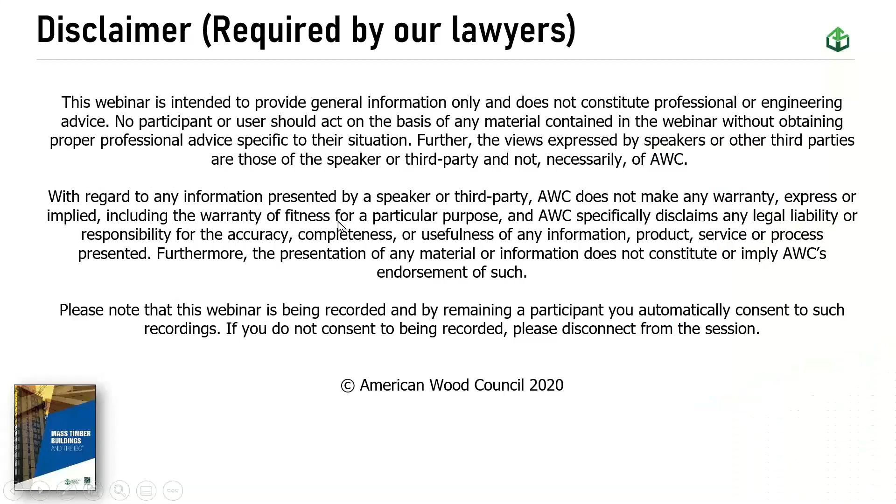A little bit about this course in particular. You've already read the description, I'm sure, but this photo here is of the Brock Commons student housing at a university in Vancouver, Canada. It's still, I believe, though not for long, the tallest mass timber structure in North America, and it is made of mass timber.

So the topic, of course, is heights and areas. This is a tall one, 18 stories above grade, 17 stories of mass timber on 1 story of type 1 podium concrete construction. And of course, the new thing here is this is wood construction.

There are some non-combustible cores to this building. You can see them on the left there. Let me get my spotlight going here. So this is part of the core, the exit shaft, elevator shaft also in the building. And the rest of it is mass timber, cross-laminated timber, glue lam, and also, of course, non-combustible materials.

I'll mention that though we're talking, the feature of this is all the tall mass timber. The other webinars, the introductory webinars to this series, do cover the mass timber products and how they can be used in low-rise as well as high-rise buildings. But today we'll discuss the development process, and really you'll get a sense of the thinking all around the topic of going higher for wood construction and why.

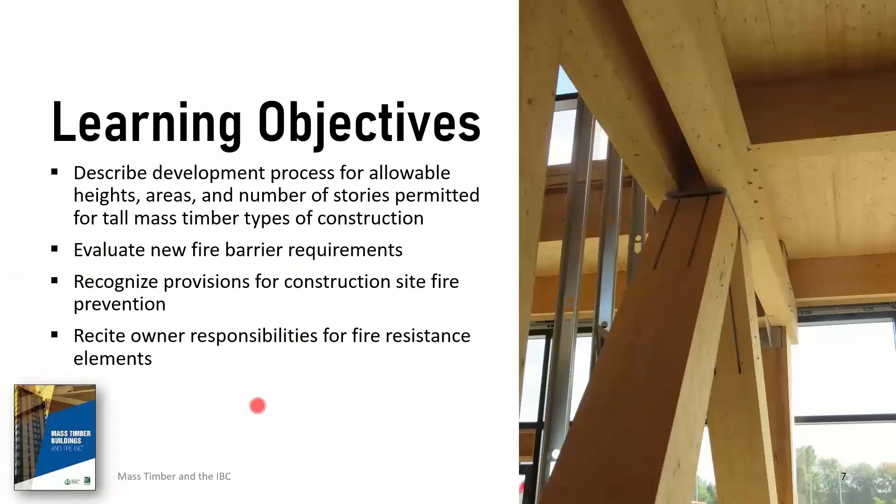A couple other just random topics, as it was impossible to list all the individual topics: fire barrier requirements, construction site fire prevention. This is really a separate topic, and it's kind of unusual that we combine these two topics, but they do go together well, because there are some specific provisions for taller wood during construction, and then the owner responsibilities that have to do with the fire code and building maintenance.

So here's the series that we've been offering. This is part 2 of the second half of the major series, which is focused on the new construction types for tall mass timber. These two focus on what is mass timber, what are the products. The second one is available on our website. You can find out what adjustments were made to the code that have to do with heavy timber, which are necessary background for really plugging into the brand new construction types.

And when I say construction types, I'm never quite sure how familiar everyone is with the code. Sometimes we have people that are pretty unfamiliar with the code on the webinars, but you have traditionally types 1 and 2, non-combustible.

Those are your highly fire resistant, taller buildings, high rises and so forth. Traditionally wood is in the mid-rise to low-rise range in types 3, 4, and 5 construction. Well, what's happened is 3 new construction types were introduced into type 4, and they can be high-rise buildings.

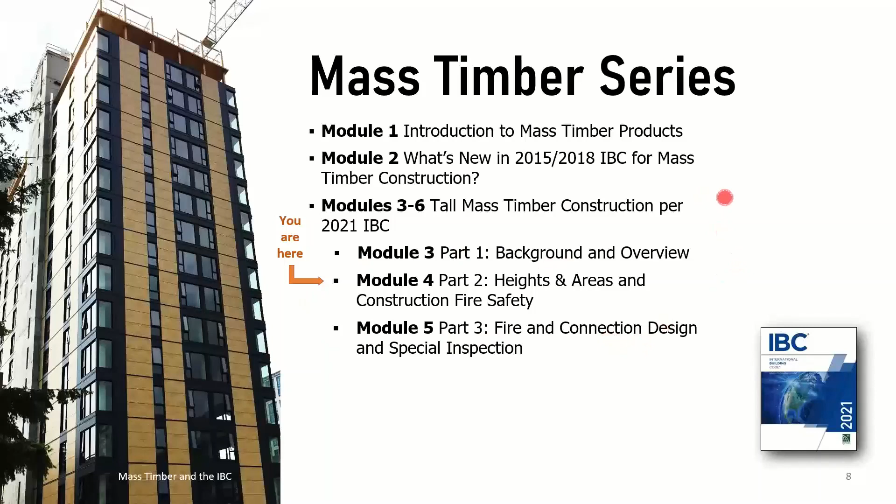Yep, it's always interesting too to see the makeup of the audience. I usually wait for about 30 seconds or until about 80% have voted. And it looks like I'm going to have both. So here we go.

All right, so 49% engineer, 32% code official, 7% architect and fire service, and then 4% other. So no matter your profession, we are delighted that you are here and hope that you find something of value.

Great. Nice spread. Glad we have a good showing with code officials and engineers. And we were discussing a little bit beforehand, the topic of heights and areas might be pretty boring to architects. They do it routinely, but this really goes beyond that. And I hope you'll find it interesting and useful.

So mass timber is not conventional frame construction. And it is new, it is very new. And if you're skeptical about that at all, and maybe perhaps skeptical about the increased heights and so forth, let me just start by saying everything you see here is not permitted over here. You're seeing studs, you're seeing joists, you're seeing repetitive member assemblies.

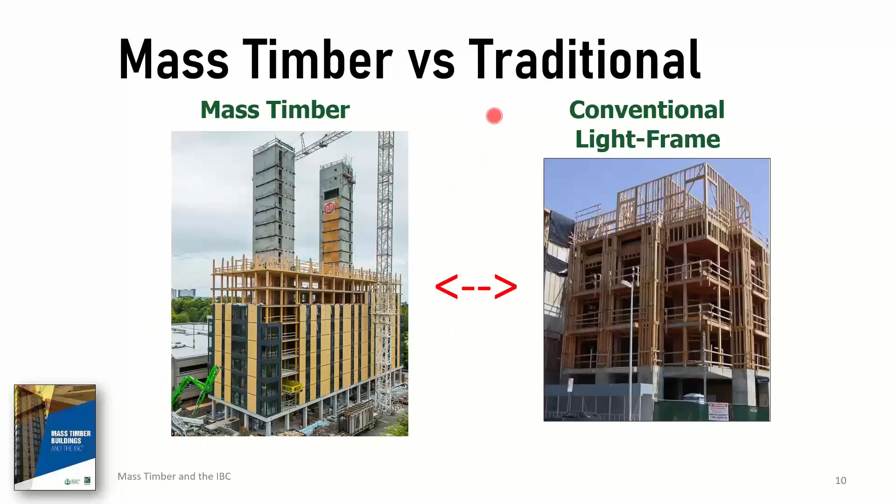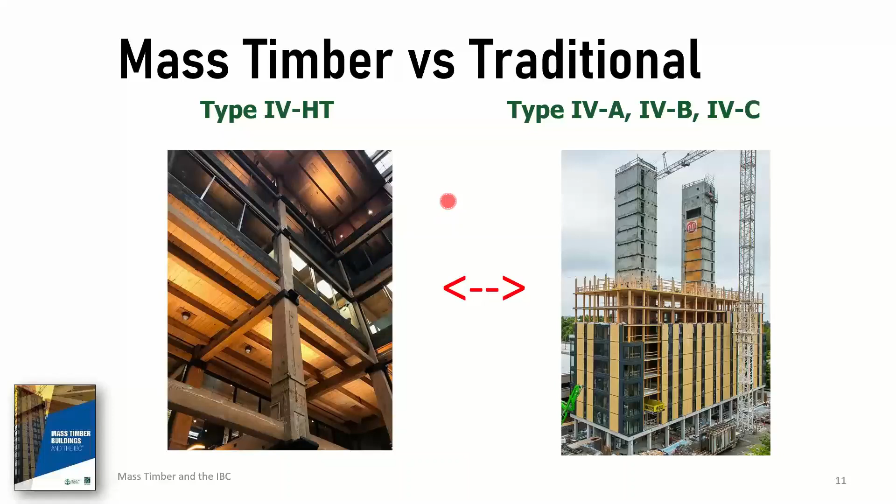Also, mass timber now on the right side here is different than traditional heavy timber construction, type 4, what is now called type 4 HT. Some of the differences here, primarily for mass timber compared to traditional heavy timber, is the fire resistance. It's very highly fire resistant compared to traditional heavy timber. And there's other features that are required for the building overall.

And I'm going to make a big deal out of this topic of non-combustible protection, because not only are light frame wood assemblies not permitted, but they have to be mass timber or non-combustible in a mass timber in the new construction types. Not only that, but we're going to see there's a new concept, and you've heard about it in other webinars already, but it's the concept of required non-combustible protection on mass timber surfaces.

So then we'll discuss heights and areas, construction fire safety, and among those, owner's responsibility having to do with the existing building when it's done.

There are a couple new definitions in the 2021 IBC. And by the way, this is available in PDF form right now from ICC. You can purchase this and you'll get the PDF right away. The printed book is not quite available yet.

And I'll mention right now, we didn't really mention it in the morning session of this same webinar, and I should have, but this document, Mass Timber Buildings and the IBC, produced by the International Code Council and the American Wood Council together, is also available. This is available in print and PDF. You can order this right now. It does go into detail and illustrations on all the requirements of the new 2021 for tall mass timber that we're discussing today. So it's a great resource. I highly recommend it. It's the significant changes book among that series for ICC, which are so popular. Well worth getting. I think it's $40 or something.

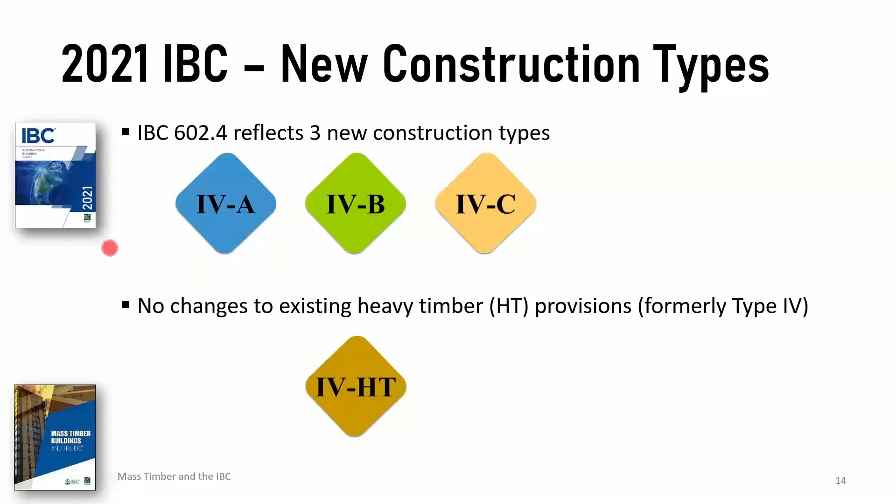I hope this will give you some context for the differences between the new construction types in regard to non-combustible protection or materials requirements.

I know that some of these concepts for the new construction types are hard to get our heads around because they are new to the code. We haven't really seen anything quite like it yet, particularly the principle of adding non-combustible protection to the calculated fire resistance of heavy timber. But this may help us with some context.

First of all, there is no exposed mass timber surfaces in Type 4A construction. Type 4A allows the greatest heights of the three construction types and the greatest areas.

There is limited exposed mass timber permitted in Type 4B. It says 100% non-combustible protection on all surfaces, except limited exposed mass timber elements. It will be around the range of 20% of the floor area for the ceiling, 20%, 40% of the floor area for the walls. We'll see that. So limited areas, not half, not even a quarter in some cases for the ceilings, but some.

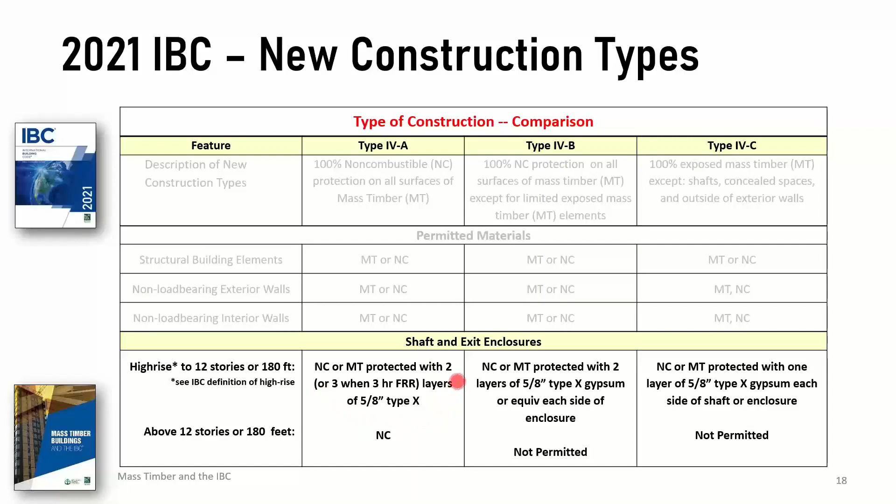They can be mass timber if they're up to 12 stories, not beyond, but the mass timber is heavily protected with non-combustible material. Same with Type 4B - the ratings are a little bit less, but the protection is basically the same, slightly less in the case of 3-hour elements.

And then in Type 4C, the shafts and exits can be mass timber. They can also be non-combustible, of course, but the mass timber is protected with one layer or 40 minutes, we'll see, of gypsum. And they still have to be required to be rated for the full time, typically a 2-hour rating for shafts.

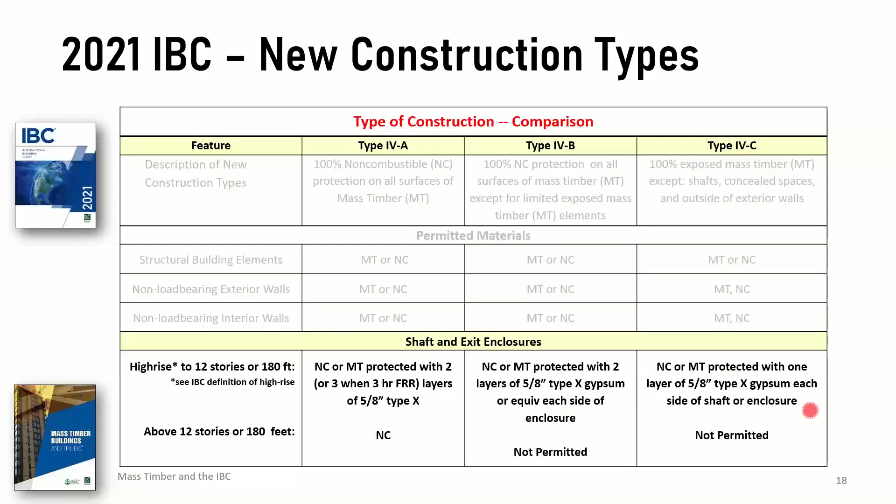So here's the new deal. We've gone into great detail in some of our other webinars about this principle: 2/3 of the fire resistance rating being achieved by the non-combustible protection on the mass timber. That's a new principle for the three new construction types. It does not apply to any other existing construction types.

So what does that mean? It means if you have a floor that's 2 hours, the whole floor has to be rated for 2 hours, and the bottom of the floor has to be protected with at least 2/3 of that 2-hour rating, which is 80 minutes. So while the whole floor together with the non-combustible protection has to achieve 2 hours, there's a minimum requirement for how much of that has to be met by the non-combustible protection. That's the new way of thinking. It does not apply to other construction types.

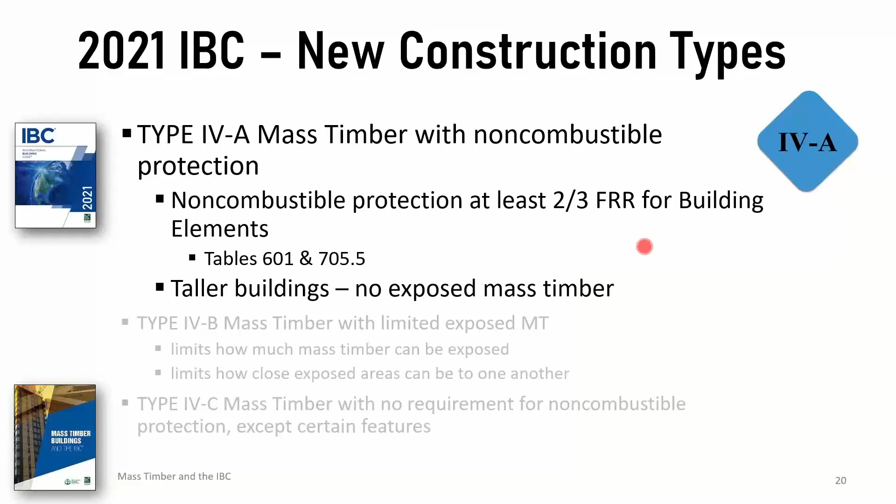No exposed mass timber in type 4A. In type 4B, the same principle applies, but you can have some exposed elements, and those exposed elements still have to meet the full fire resistance rating by calculation for an exposed element. So typically on the parts that cannot be exposed, which is most of the surfaces, you'll have some overkill on the fire resistance ratings because they'll go ahead and add the required 80 minutes for a 2-hour, 2/3 of 2 hours, and there'll be that much more fire resistance.

And then type 4C, there's no particular requirement that the 2/3 has to be achieved by the non-combustible protection, except certain features are still required to be protected. As I mentioned, shafts and concealed spaces are the primary ones.

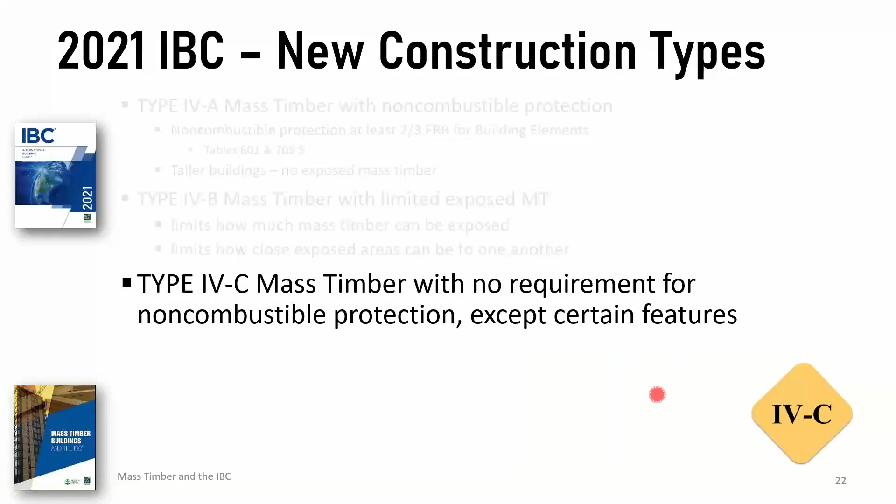All right, a poll question. I'll turn this over to Marcy and see if you've caught what I said about type 4A construction. So type 4A construction: what fraction of the required fire resistance rating must be provided by non-combustible protection? Is it 1/3, 1/2, 2/3, or variable depending on the building height?

All right, I've got about 70% and 45 seconds, so I'm going to close and share the results. So 67% say 2/3, 25% say variable depending on the building height. Paul, what say you? I say 2/3. So let me advance the slide to highlight the answer.

So for 4A construction, whenever it's required to be fire resistance rated, it always requires 2/3 to be achieved by the non-combustible protection, no matter what the height of the building. If it's required to be 4A, 2/3 of it has to be achieved by the non-combustible protection. This was a tricky throw off there. There are other things that do depend on the height.

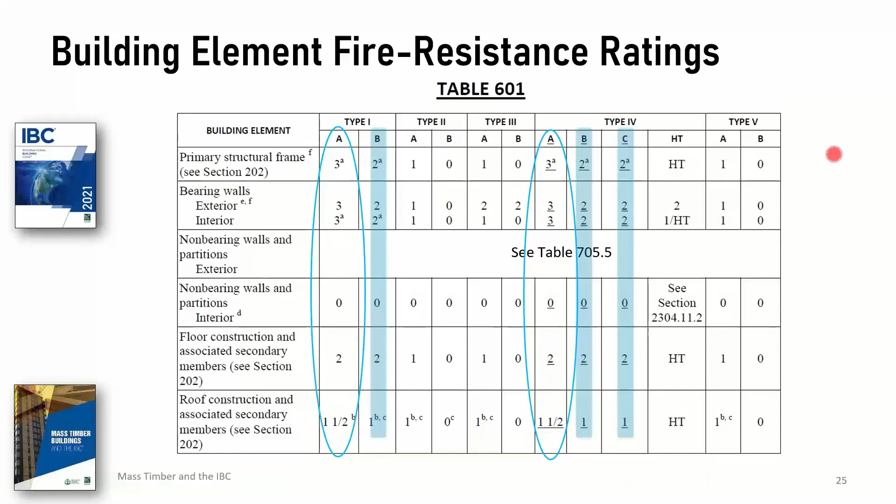This doesn't exactly match your PDF, so don't be alarmed, but I did insert the title for this table. Those of you who got an earlier version of the PDF, it just says table 705.5 up there. Same slide, same table content, just added the title back in, which was omitted for some reason—my mistake.

You might say table 705.5 doesn't ring a bell. That's because in the 2018 code, it's table 602 for exterior walls. Currently in your code, when it comes to exterior walls, you have two tables to worry about: table 601 that we already looked at, and table 602. But that number has been changed.

Now, both tables deal with exterior walls, as you know. So what if these conflict? This is what the code requires you to do: you take, for the exterior wall in question, the more restrictive fire resistance rating between the two tables. End of story for what the rating has to be. Just take the most restrictive. Now, some of you are questioning in your minds the two different purposes of the table, thinking they've got to work together better than that. No, that's all it is—the more restrictive rating.

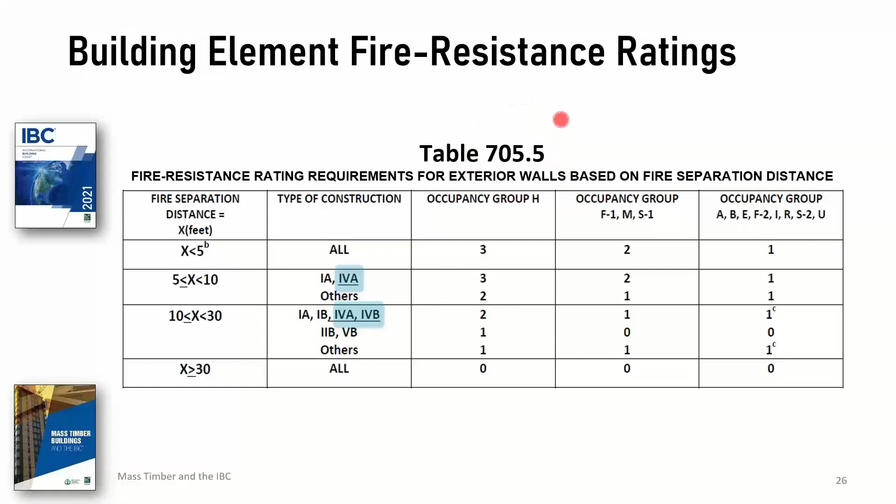Where did I find that requirement? Well, that requirement's in section 705.5. It's not new, by the way—that's been in the current code.

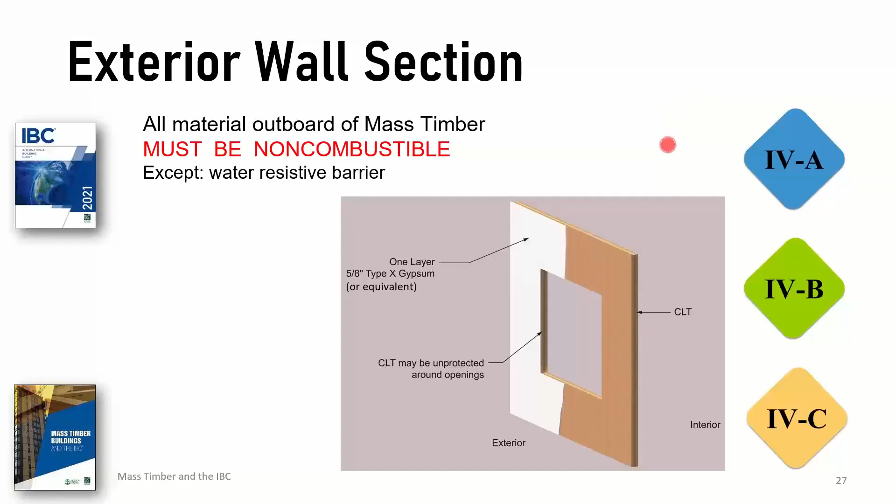Secondly, there is 40 minutes of non-combustible protection required against the mass timber on the exterior side—equivalent to one layer of type X 5/8 inch thick gypsum board on the exterior side. Ray makes a comment in his portion of the presentation about some of the reasons for this, which has to do with the committee deciding they never wanted a fire to be able to travel up to greater heights in a building by taking the route of the exterior side of the exterior wall. This requirement applies to all these construction types.

I'll give you an example now of a cross-section of a type 4A exterior wall. This is an exterior wall, so right off the bat, this is the exterior side. It's got that 40 minutes of non-combustible protection on the exterior. On the interior, if this is a bearing wall, this has to be 3-hour rated. Table 601 tells us bearing walls in type 4A have to be 3-hour rated.

We've said that 2/3 of that overall required fire resistance rating has to be achieved by the non-combustible protection. 2/3 is actually 120 minutes—3 layers, the equivalent of 3 layers of 5/8 inch thick type X gypsum board over here. So it's a typical bearing wall in 4A. You can see how conservative this is in terms of fire resistance. And by the way, fire resistance for a mass timber wall that's solid timber is really quite different than a repetitive member assembly. When we did our first compartment fire tests with mass timber, AWC did it back in 2015. We did an exterior wall test, and it was a 5-ply exterior wall.

This just shows 3-ply, so that would have been like, let's see, 5 would have been like 7.5 inches thick or something. But anyway, we had 1 layer of 5/8 inch type X gypsum on each side, and the wall achieved a 3-hour fire resistance rating with just 1 layer. So the massiveness of the timber and the uniformity of the plane to support the gypsum, all that kind of stuff - really, fire resistance for mass timber is significantly greater than for frame assembly.

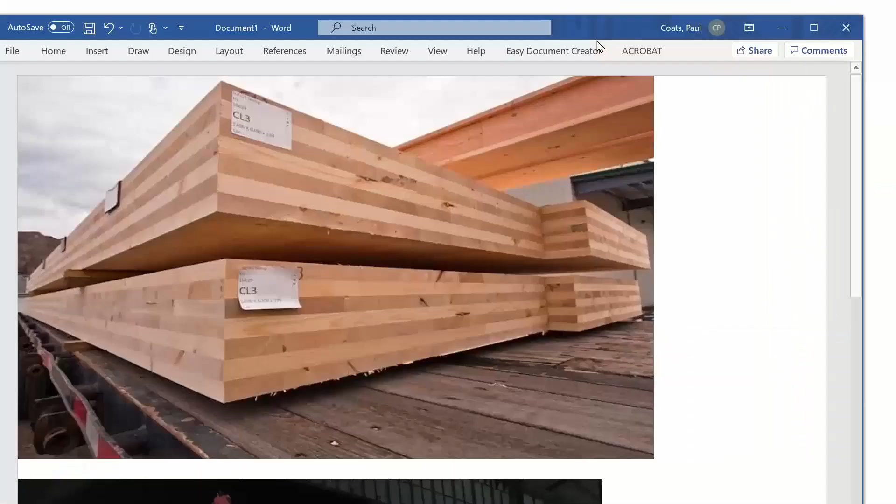I'm going to pull in a photo here. This is, if you are not familiar with cross-laminated timber, a good picture of it. It makes solid timber walls, floors, and roofs. This is what the structure was that was tested.

Let's see if I can. Whoops! I got to get out of this apparently. Let's see if I can do this.

So the test was performed in this test facility. You can see the scale of the testing here. If you haven't seen these photos already - they burned this one with an exposed ceiling already, and they're replacing the CLT panel for another test. I just wanted to pull those photos in to give you a sense that they let these fires burn out.

They wanted them to perform like type 1 buildings, and that's what they were testing for. So the protection, conservative as it is, we are going higher. At first blush, people think of a wood building going up to 18 stories - they think it's not the same story as a typical wood building, and the testing has really supported that.

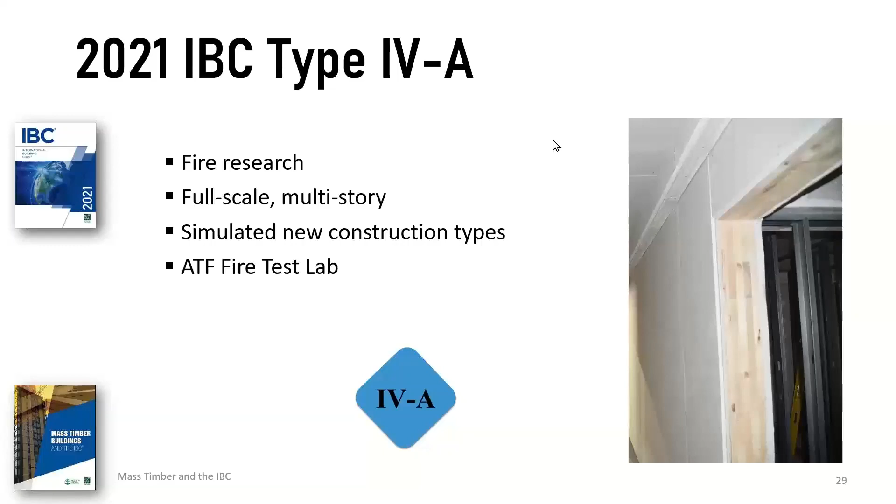So going up, here's a first requirement right off. Let's say you have a type 4A building - this shows a schematic at 18 stories. Only certain use groups can go up to 18. But you have 1 inch of non-combustible material above the mass timber on the floor, and this also applies to type 4B buildings.

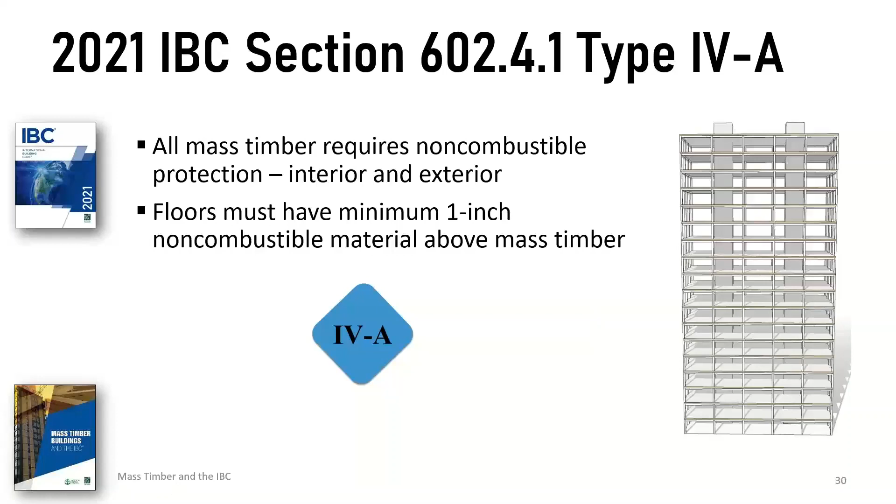Of course, we've already discussed the interior and the exterior covering. The reason the committee included the 1 inch on the mass timber floors was they had not tested anything, nor seen any tests, that were not done with floors protected with concrete. So they decided they needed to keep that as one of the requirements.

Just looking again quickly here at a type 4B wall section. The difference between type 4A and 4B is this: you can have some exposed mass timber, and 4B is never required to be 3-hour rated - it's always 2 hours. So you have 2/3 of that is 80 minutes, which is 2 layers of 5/8 inch type X. These are supposed to be equally thick layers - the diagram doesn't make it look that way. But once again, 2/3 for 2 hours is 80 minutes.

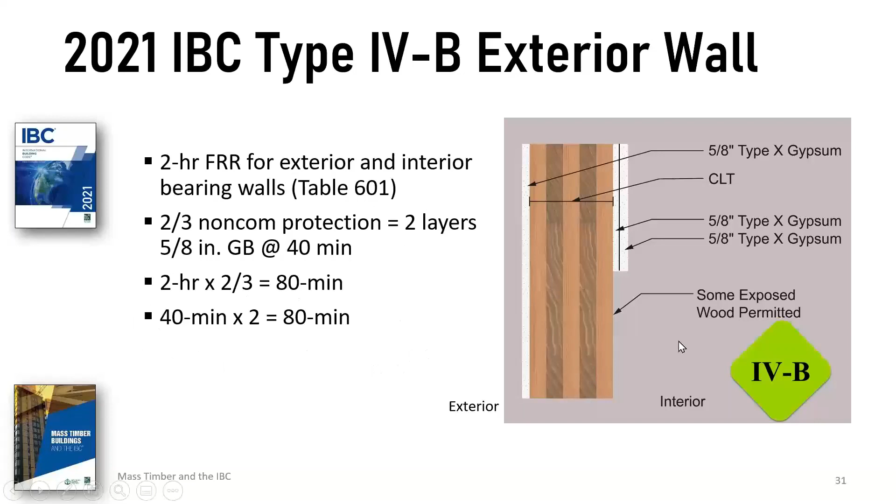So this little calculation shows you how you can get the 80 minutes, always with the 1 layer on the exterior for the 40 minutes. And what about that unprotected section? How much can be unprotected? I'm going to show you a few pictures here about how much can be unprotected.

But this is the actual code language: if you're not protecting the ceiling, some part of the ceiling, 20% of the floor area can be exposed on the ceiling. If you're not protecting the walls, an area equal to 40% of the floor area can be unprotected on a wall. And in the dwelling or fire area, it would be on all the walls together, not more than 40%. And then you can make a combination, but you have to use a formula that I'll explain in a moment.

Now notice this wording: in any dwelling unit or fire area. For you code officials, the amount of exposed mass timber will be calculated in comparison to the floor area of both - you have to check the dwelling unit and you have to check the fire area for that limit.

Columns and beams that are not integral to a wall or ceiling, the surface area of them does not have to be considered in this calculation. However, don't be confused. If it's part of the primary structural frame or it's a structural column, it still

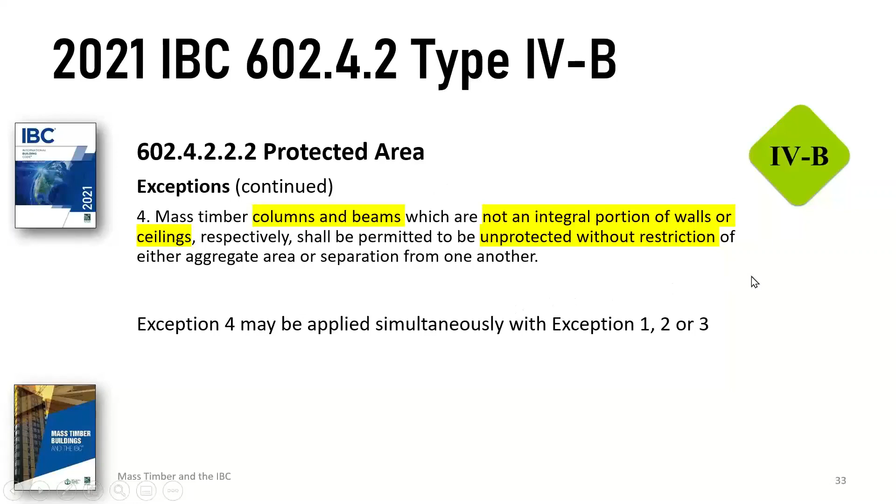may have to be protected with that 2/3 of the required fire resistance rating for the element. And if it still has to meet the full rating, and if it's integral, you can leave it exposed as long as it's still fully rated, but then you have to count that surface area into the amount of exposed area in the dwelling unit or the fire area. I hope I'm not being too confusing the way I'm describing it.

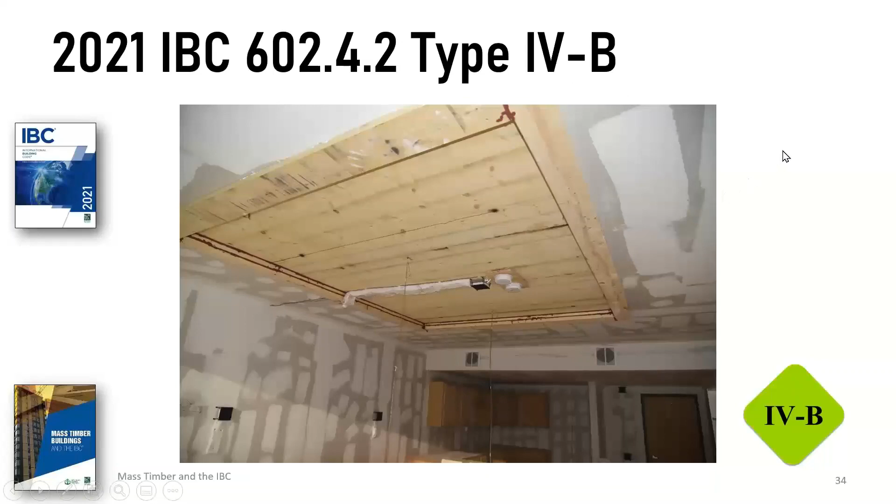But this is a test at the Tallwood Ad Hoc Committee at the Bureau of Alcohol, Tobacco, and Firearms test facility. They left the ceiling exposed to simulate a type 4B construction simulation.

actual amount of unprotected area on the ceiling over the allowable amount of unprotected area on the ceiling. The actual unprotected area on the wall over the allowable unprotected area of the wall. And then you add those ratios, it has to equal 1 or be less than 1. And if this seems familiar to you, it's the same principle used for calculating allowable areas for mixed use occupancy buildings. So you have seen this kind of equation before.

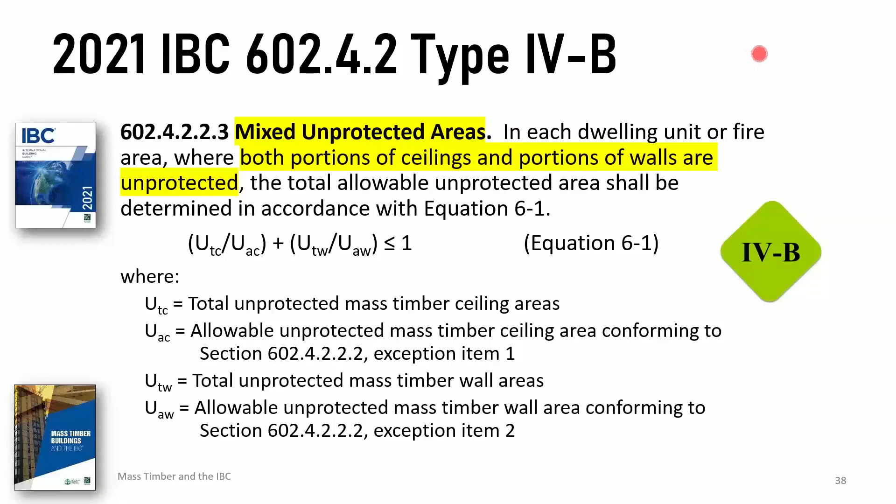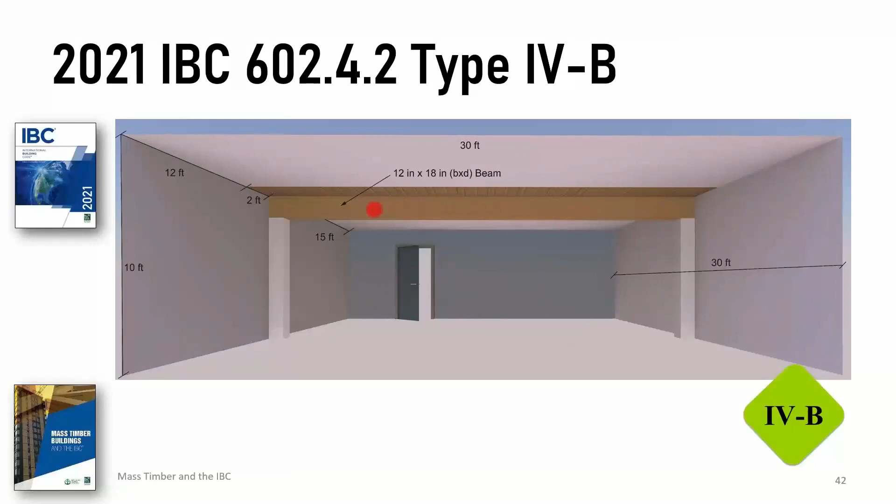This could be exposed without adding to the area of exposed walls, for instance. It could be exposed. And this beam, if it's exposed, its surface area has to be added to the calculation for how much of the ceiling area could be exposed.

By the way, these illustrations, along with the numbers for working this out, can be found in this manual that I told you about at the beginning. And this is showing an exposed beam, exposed column, and the area of the exposed column would not contribute to the area allowed for the exposed walls, but the beam would have to be.

And this schematic is just showing how these kind of limits might actually appear in a single story, or in a multi-story, high-rise building. These are not floor openings. They're showing where there might be exposed mass timber, just for purposes of illustration.

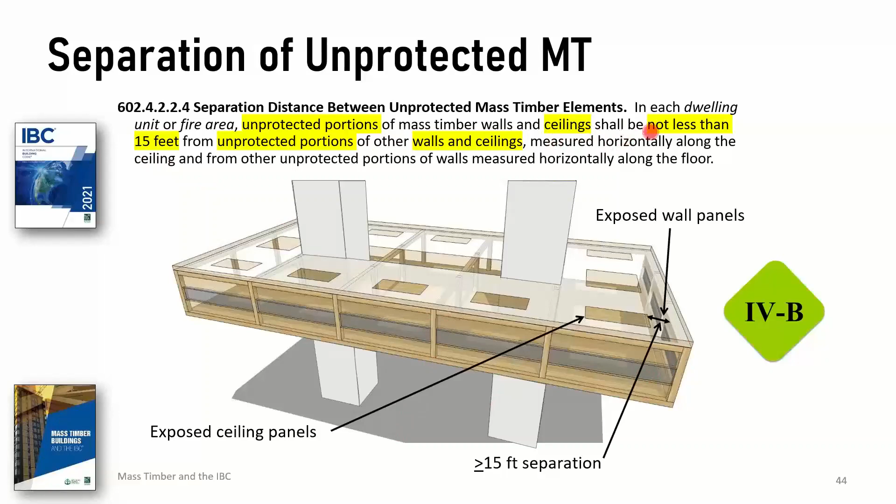So if you have exposed ceiling areas and you also have exposed wall areas, there's one more requirement. It's about being separated by not less than 15 feet. So let me show you here.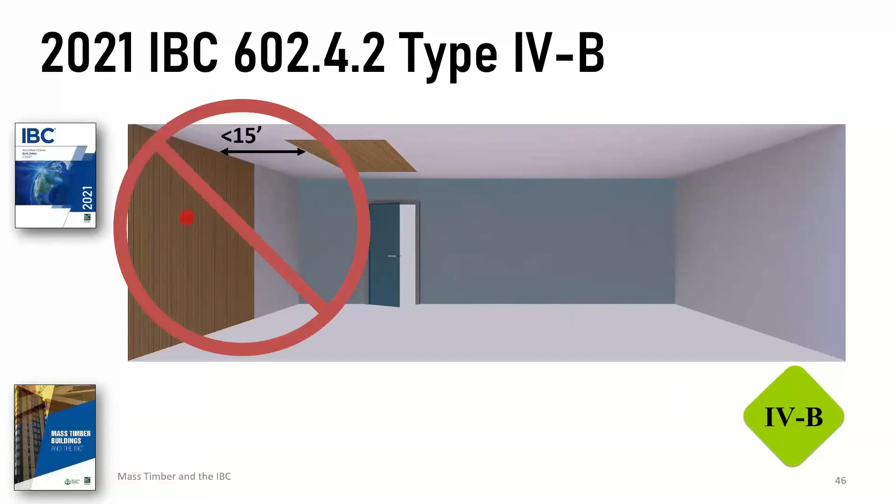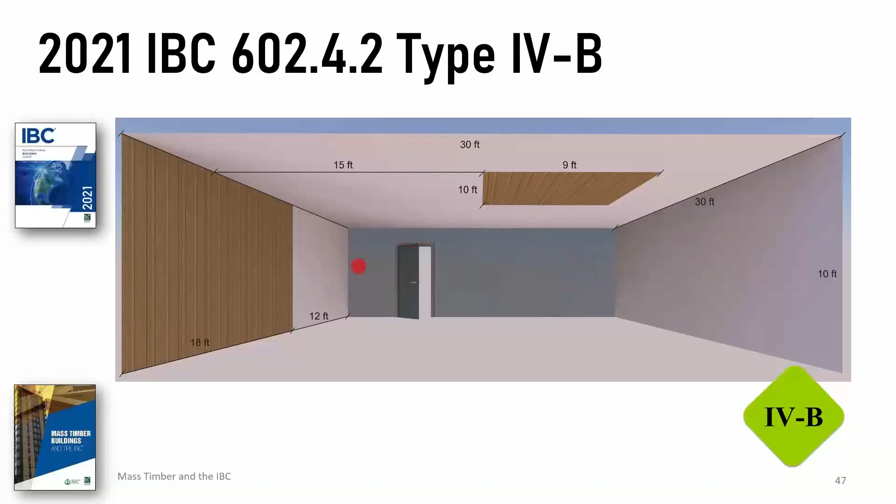Let's go here. Wall, ceiling, 15 feet. If that doesn't meet 15 feet, got to move it over. What's the concern here? Well, in a fire scenario, if the sprinklers don't put it out or the sprinklers don't go off, you don't want the contents fire.

This will obviously begin to burn, char, and may reflect off each other. We don't want them reflecting off each other. This will enable, when the contents are burned out, the combustion of the mass timber to be unsupported. It will go out because it doesn't have enough fuel to keep going, and because it is mass timber. But there has to be some separation so they don't reflect off each other.

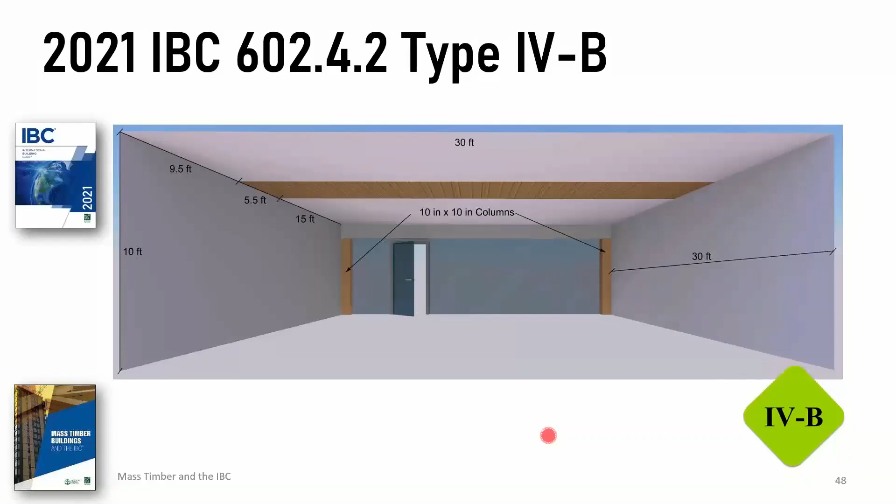That's the kind of thing they experimented with and tested in the full-scale testing. Okay, this shows 15 feet there. This shows you can measure it as the crow flies between two different wall surfaces.

So let's talk about type 4C.

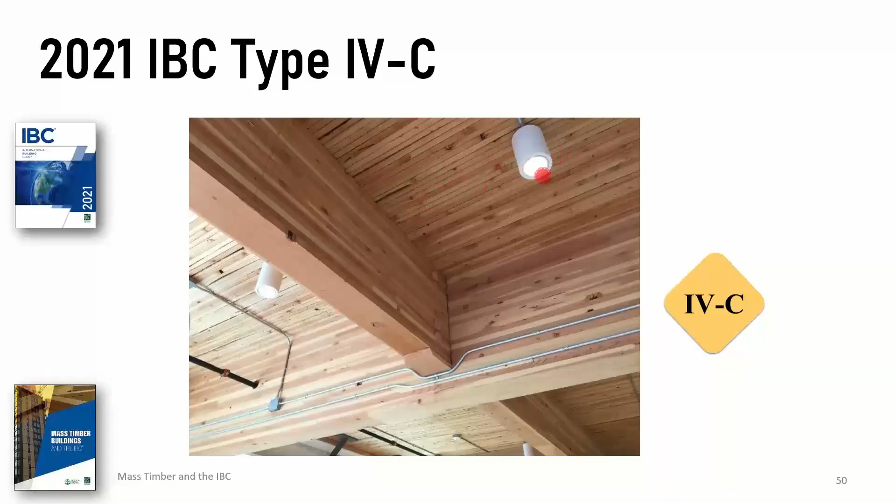But type 4C, the interior areas have no requirement for non-combustible protection. This is showing what looks like a nail laminated timber assembly, and then glue lams for beams.

It can be exposed in all interior areas, but there's a few features that cannot be exposed: the exterior side of exterior walls, as we've already said. The floors do not have to have that 1 inch, but they can have typical floor coverings.

And by the way, even in the higher type 4 construction types, as long as they have that 1 inch of non-combustible material underneath the floor covering, it can be traditional floor coverings on top. You could have traditional wood floor coverings, for instance, on top of that non-combustible material, but the non-combustible material is protecting the mass timber structure beneath it, or it could be conceived to serve that purpose.

And then even in type 4C, in concealed spaces, the mass timber can't be exposed. So that's flipped a little bit. Your real fire hazard is in your interior areas. They can be exposed, mass timber can be exposed, but...

What the committee was concerned about was if fire does get into a concealed space in a fire scenario, that it would travel through the concealed space. So there was no reason not to require it to be protected, the same protection as the rest of the structure, or in this case, of type 4C in terms of shafts.

Why can the interior be exposed? Well, it's living area. It's viewable. We know where the fire is. We know how to address it. In almost every case, the sprinklers will address it, but if not, then it's visible. People will leave, the fire will burn. It won't be traveling through spaces of the building that can't be seen.

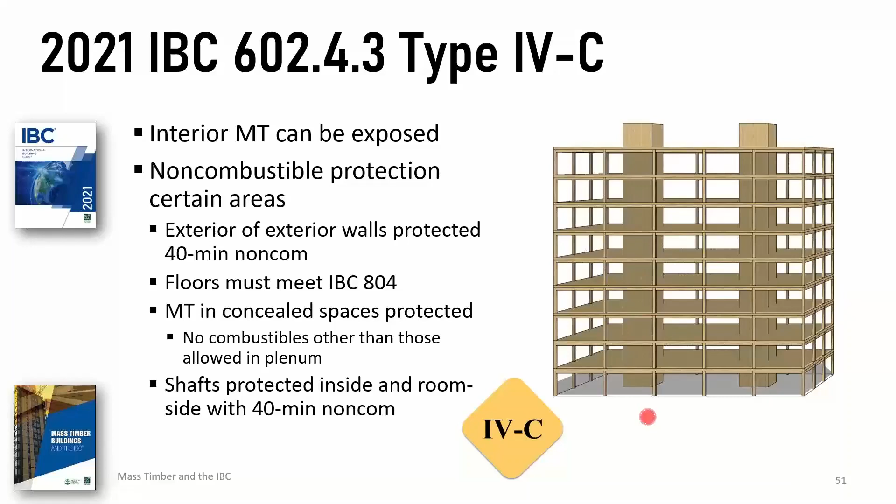It will need to be addressed in a type 4C building, but it's more manageable when it's confined to the interior areas and not left to go throughout the concealed spaces. And then shafts, a strong life safety feature, contain your exit stairs or your elevators, and both need at least 40 minutes protection on each side.

So a typical type 4C wall section, this is an exterior wall because it shows the 40 minutes on the exterior side.

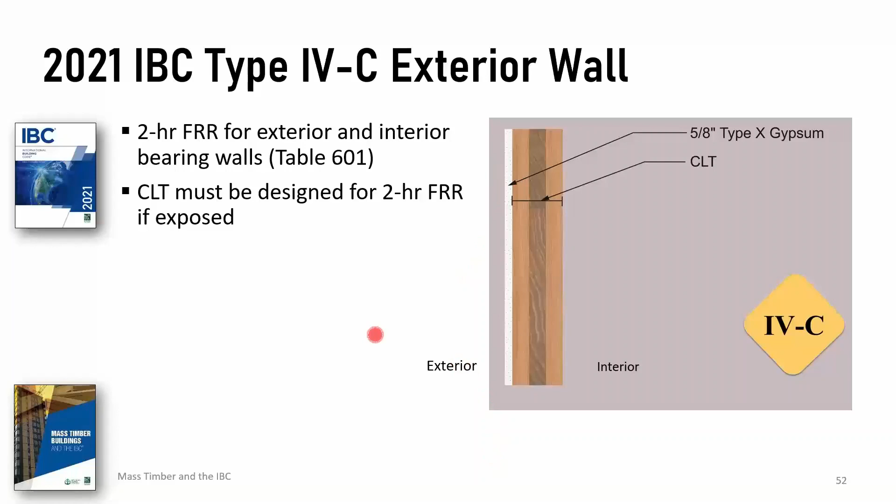Okay, Marcy. So mass timber shaft walls in type 4C construction must be protected by a minimum of how much non-combustible protection? None, fire resistance rated only, 25 minutes, 40 minutes, or 80 minutes.

This one's a little bit split, but there is definitely one answer that's a forerunner. Yeah, it might be a little tricky if you don't read the stem carefully. Now everybody's going back and reading the stem. All right, so I've got 70% in 45 seconds. So let's close.

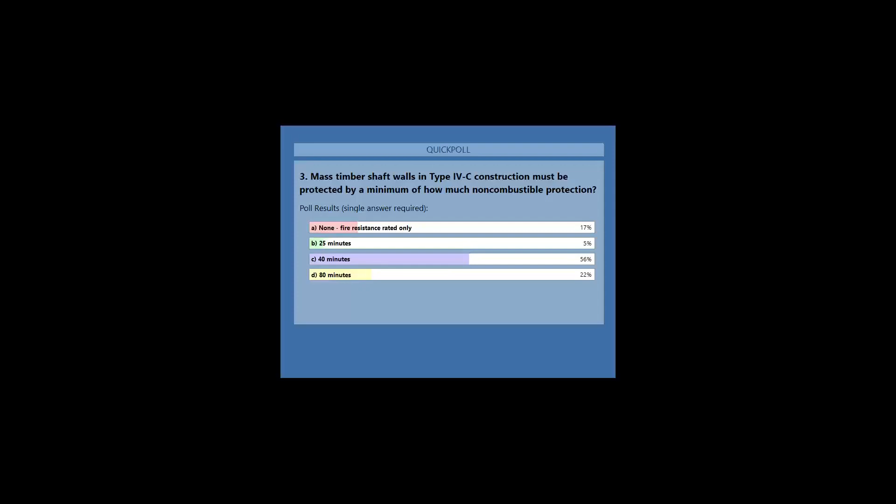So 56% say 40 minutes, 22% say 80, and 17% say none. So Paul, what do you say the right answer is?

Okay, it's 40 minutes. And let me just review quickly here. First of all, it's a shaft wall. We made a big deal that type 4C doesn't require non-combustible protection, but shaft walls do. And what is it? 40 minutes on both sides. So the key here was making sure you saw the shaft wall provision.

The 80 minutes would be applicable to, well, let's see, would it be applicable? Wouldn't be applicable in... think about this. Where would that be applicable? That may be applicable in concealed spaces. Let me think about that a little bit. But anyway, 40 minutes is the correct answer for shaft walls.

And how about the rating? Still has to be 2 hours, okay? 2-hour rated walls. So the 40 minutes is not all you have. You've got the 2-hour rating, typically for shaft walls above 4 stories, right? 4 stories or above.

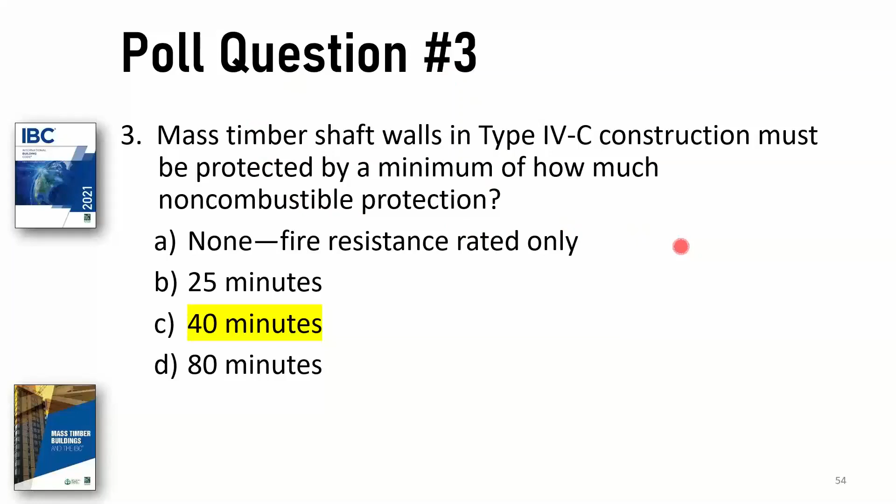Just a little illustration here in the actual code text. The new principle, once again, is this: floor, if it's 2 hours, the whole floor has to achieve a 2-hour rating. Then the secondary requirement, unique only to these construction types, is 2/3 of 2 hours has to be accomplished on the surface. So this would be 80 minutes here for the floor, if this is 2 hours, because 80 is 2/3 of 120 minutes. And the same for the beam.

Now I've been talking about this, there's a lot of words here. I'll just tell you what this is about. This is showing you that you don't have to use gypsum wallboard for the non-combustible protection. You can use any non-combustible material, and if you have some other material you want to use, test it.

Test the assembly, the mass timber assembly without the protection, and then test it with the protection. The code provides a way for any non-combustible material in the typical fire resistance tests to demonstrate that it's contributing 2/3 of the fire resistance rating.

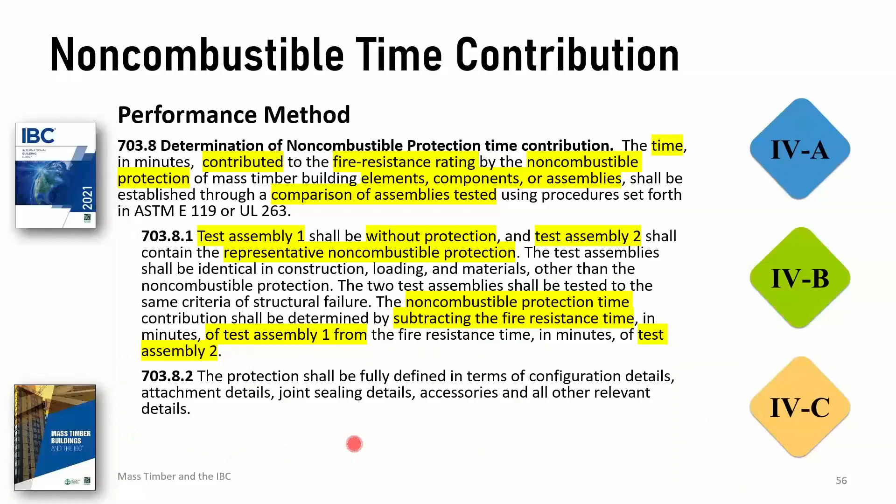If you don't want to do the test, you can use the prescriptive gypsum details provided for in that subsection. That subsection will say, if you don't want to run the test, use these tables. So if your element is 1 hour rated, you've got to have 40 minutes. If it's 3 hour rated, you've got to have 120 minutes of fire resistance contributed by the non-combustible protection. And then it gives us another table that shows you a handy reference for how many minutes typical gypsum wallboards give.

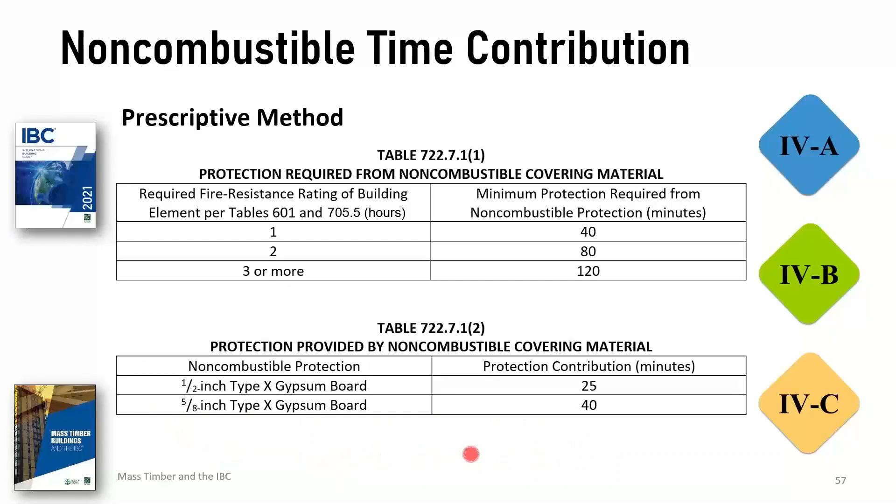There's prescriptive provisions in the code for attaching the non-combustible protection. For you code officials, this will be a plan review and inspection point, certainly how the non-combustible protection is installed. You have minimum fastener sizes, minimum staggering of joints in each layer of gypsum, and a detail that requires the wall gypsum board to always be supporting the ceiling gypsum board, not the other way around. So this will be an inspection detail to make sure the gypsum has full effect for protecting the mass timber.

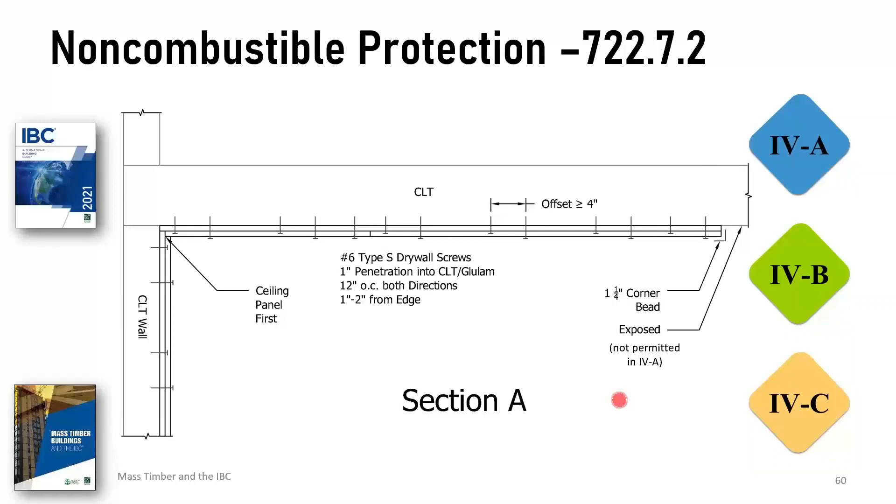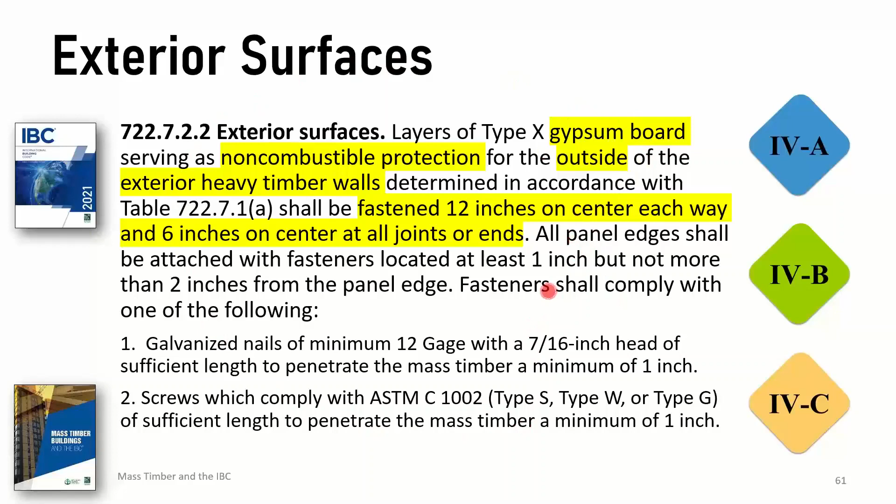And the same prescriptive details for nailing and so forth for the gypsum on the exterior. Same thing, yep. Just to show you have code provisions for that as well.

And finally, there are some relatively minor, subtle requirements for occupancy separations and incidental use areas. And what all these words are saying is simply this: if this is a required occupancy separation between group B and group R, and you're in a type 4B building where maybe you could have some exposed mass timber over here, what those provisions say is you can't have it exposed over here if it's a required rated occupancy separation or required rated incidental use separation.

In that case, you of course still have to achieve the full rating that's required, but you also have to make sure you have at least a 1/2-inch gypsum board protection. The code actually calls it a thermal barrier, but it's a bad term. It's not a thermal barrier, it's just non-combustible protection.

And yes, I am criticizing the committee a little bit, and I may be wrong, but I think we've all agreed through many discussions that thermal barriers are meant to protect foam plastic insulation in buildings. That's the way the code uses the term thermal barrier. This is not protecting anything hazardous, it's just more non-combustible protection, more fire resistance for the mass timber.

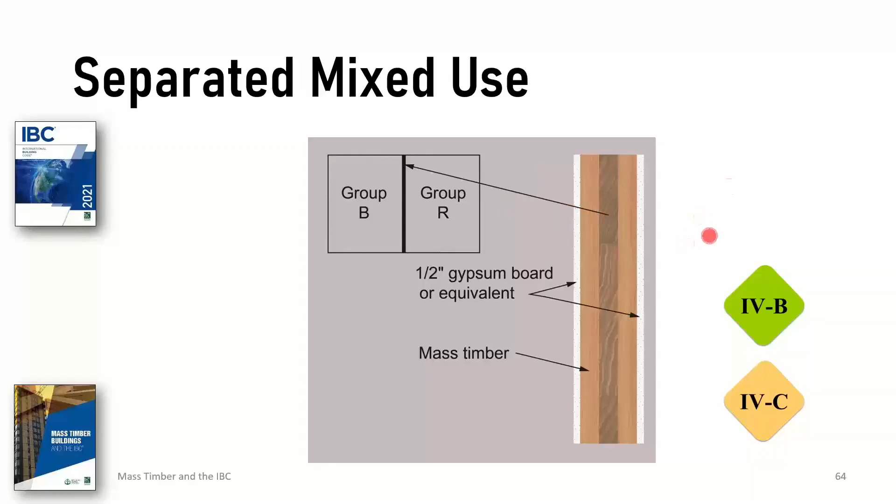Okay, so it's a minimum amount required. You still have to use the rating. Just be aware that that requirement is there.

So now finally, we're going to actually step into what are the numbers that are the result of all this protection and research that's gone in. And I'll start by saying you use the exact same formulas for height and area that you're already using in Chapter 5, and you use the same tables, that is, if you're currently on the 2015 or later IBC.

And so it looks like this: the new tables in Chapter 5, you use the same formulas that you did before and plug and chug. You go in and find your limits for height and feet above grade for your new construction types. These are new columns in Table 504.3. You can see that the heights in general are parallel, pretty much, not quite, to Type 1B.

Some of them are considerably less. One of the procedures of the committees was to go through and think about each occupancy and make some judgments on when they needed to be reduced, through many discussions and votes and so forth. You'll notice that the allowable heights for Type 4A are certainly not unlimited, as they are for 1A, but they do go up to considerably high for certain use groups, 270 feet.

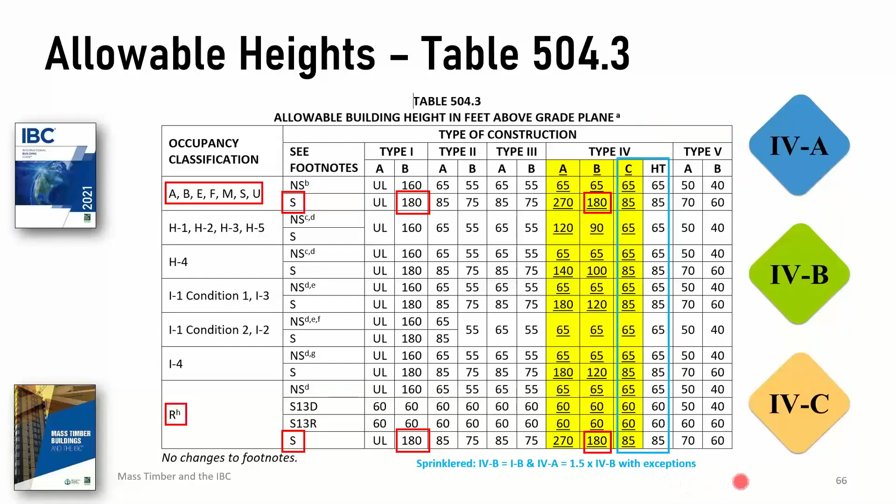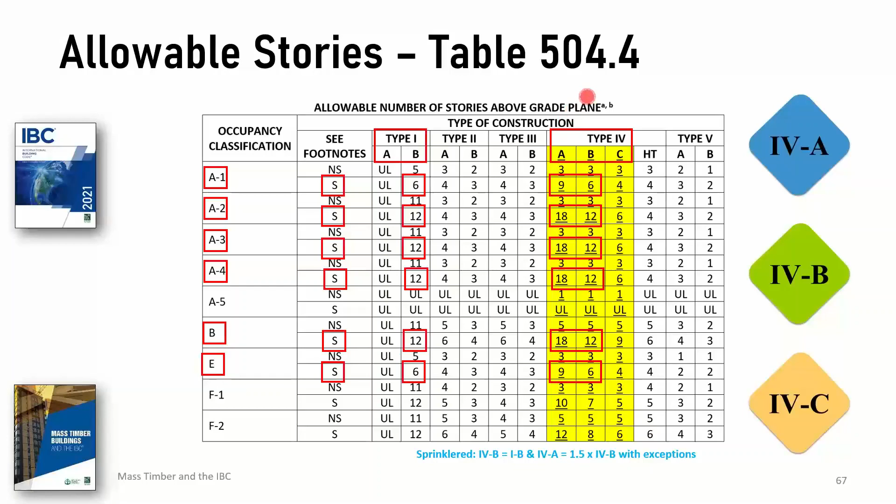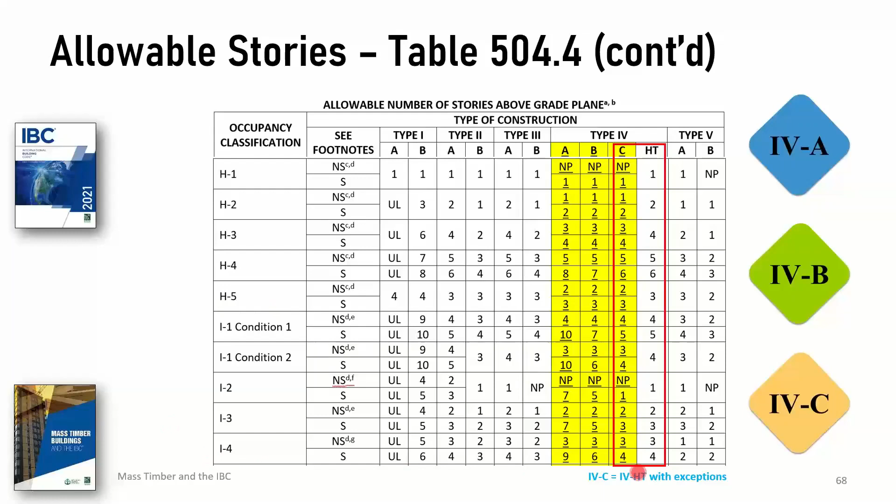Let's look at the hazardous use groups, greatly reduced, as you can see. Institutional I2 greatly reduced. How about group R? So just like B, up to 18 for the highly rated, highly protected mass timber. Drops down when any exposed mass timber, it drops down to 12 stories as a maximum for hotels and apartment buildings. These changes in the table down here are miscellaneous changes that are corrections to the code for certain construction types and occupancy groups, group S in the S group category. They're unrelated to the tall wood provisions.

How about areas? First of all, keep in mind that since the 2015 edition of the code, table 506.2 is allowable area factor. So these figures in these boxes do not represent a realistic allowable area per story for any particular occupancy or construction type. They all have to be factored with those equations in chapter 5. So this was quite a bit of a revision in the IBC for the 2015 edition. It does result in more accurate allowable areas per story and heights. By more accurate, I mean it helps prevent mistakes when people make mistakes.

The committee said, well, let's see, 4C is 2-hour rated, whereas HT is not rated, but generally considered by virtue of the heavy timber to be about 1 hour. Let's give them a 25% increase in area per story. So that's what they did. They evaluated B as a two times increase in area per story, and then the heavily protected, highly rated type 4A, three times the allowable area per story of traditional heavy timber.

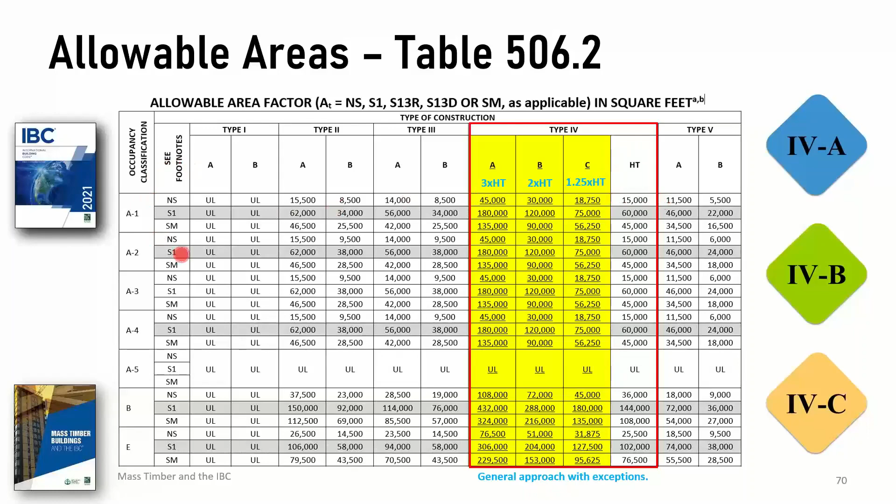You might say, what are these? Well, I'll move down here to group R's. We can look at those while we're doing this. So here's the allowable area per story, group R. Again, the factor — these all have to be factored. These do not reflect the allowable area per story of any particular building.

Non-sprinklered 13R system, sprinklered 1-story, sprinklered multi-story — that's what these rows stand for. How can you have a non-sprinklered row? Well, all group R's do have to be sprinklered. So this is used only for existing buildings. And also, I might remind those of you who are used to using these formulas in chapter 5 that the NS value is used in those equations in chapter 5. So it's needed for those equations.

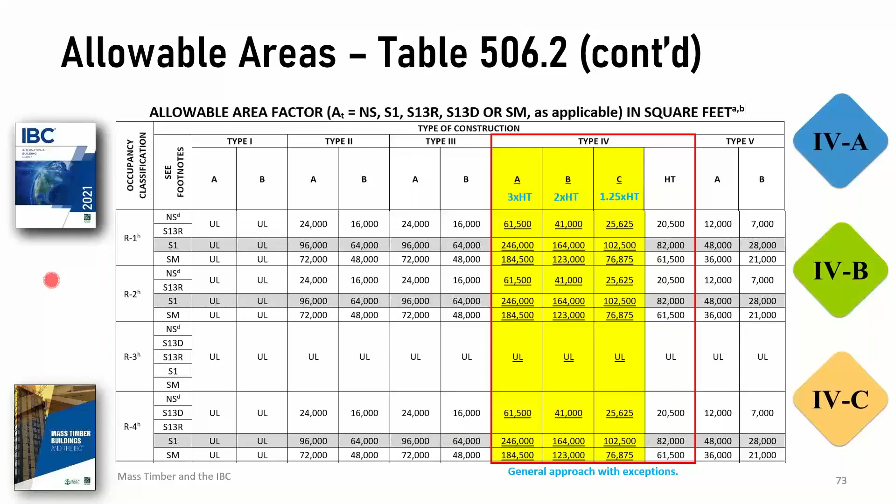And you can peruse these numbers at your leisure. They do result in good sized buildings, but keep in mind that there's also a total allowable building area, not just area per story, but building area that kicks in. So as these buildings get taller, they're not unlimited in area. The area of the total building has to be limited to the area that is represented by the maximum single story area times 3. So as a building gets up to 18 stories, these allowable areas per story get smaller.

Keep that in mind. But anyway, type 4A, a little summary table. For some occupancies, up to 270 feet. Number of stories varies by occupancy. Fully protected mass timber. Sprinklers, yes. And we had the question in the morning, what are all these required to be sprinklered? Sprinkler requirements are the same. If it's a high-rise building, it's required to be sprinklered.

If it's a group R, it's always required to be sprinklered. So you can have some mid-rise to low-rise group B, for instance, that may not be required to be sprinklered. But for the most part, as soon as you hit 75 feet on an occupied floor level, 75 feet above the access for the fire department below, the code requires in Chapter 4 that the building be sprinklered. So anything high-rise has to be sprinklered. Same with mass timber.

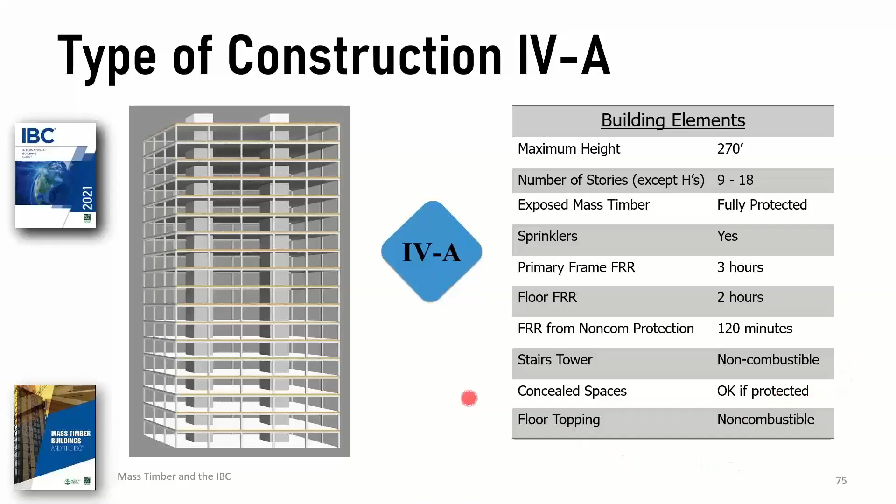So the primary frame is 3 hours. The fire resistance contribution of the non-combustible protection is 120 minutes, very conservative. The floor framing, 2-hour rated. Stair towers, once you're beyond 12 stories in type 4A, the stair towers are non-combustible. They cannot be mass timber. If the building doesn't exceed 12 stories, they can be protected mass timber. Floor toppings required. A summary table for type 4B as well.

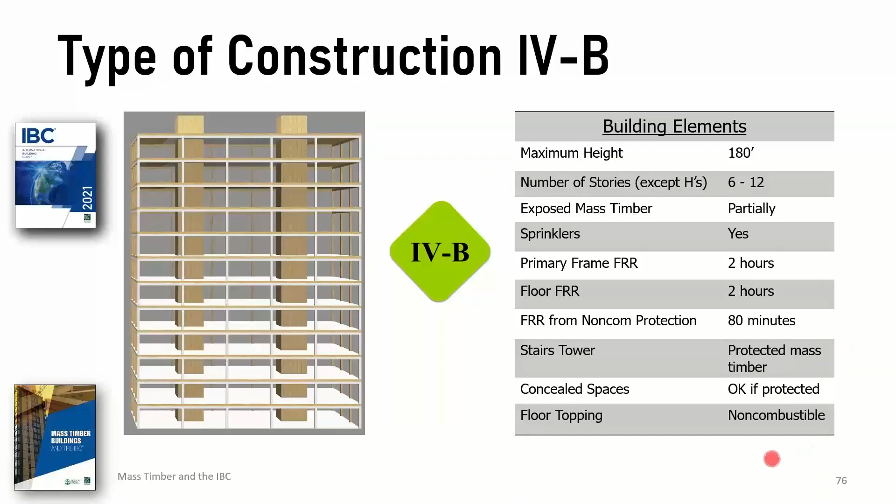So you can look this over at your leisure. It tops out at 180 feet, tops out at 12 stories for certain occupancies, not all. Partially exposed mass timber, and those limits we discussed. Stair towers, since it's up to 12 stories, can be mass timber, but must be protected with non-combustible materials.

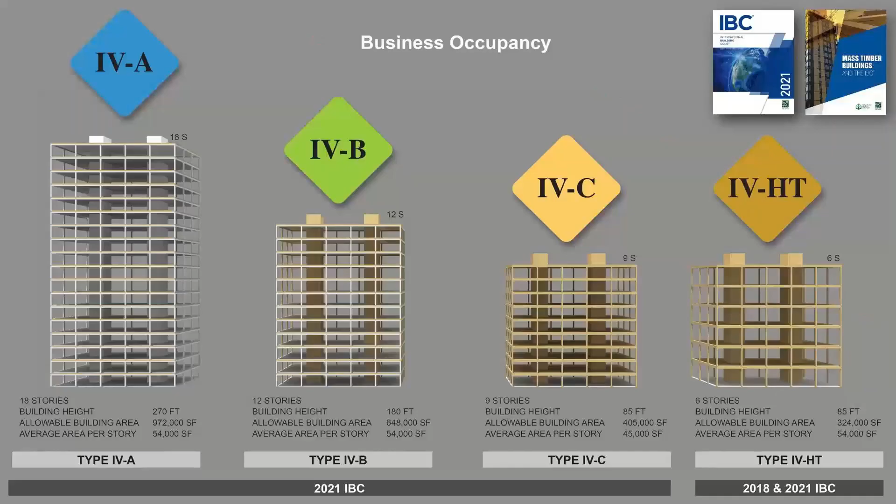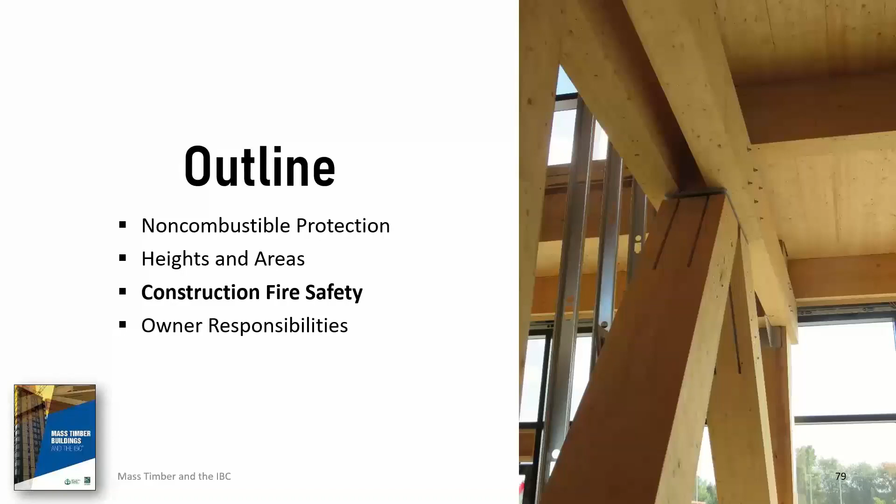My name is Ray Obrocki. I'm the manager of Fire Service Relations for the American Wood Council. Prior to that, I was a Baltimore City firefighter for 23 years. I was the fire marshal for the city, where I oversaw the fire marshal's office, fire code enforcement, and fire investigations. Then I retired as assistant fire chief and went to Rockville, Maryland, a small city outside DC, where I was the chief building official, and the fire marshal's office actually fell under the building department there. Then I went on to be the chief building inspector for Prince George's County, a large county suburb of DC, and now I'm with the Wood Council.

So I tell you that just so you know who I am, and also because construction fire safety really does touch building and fire officials. Both are responsible for ensuring that these sites are safeguarded.

Over the past several years, there have been several fires in buildings under construction. We've all seen them on the news. Many of these fires were in large structures of light frame wood members prior to the installation of active and passive fire protection systems—multifamily mixed use buildings. These fires were at least trending up, at least in the minds of the Tall Wood Building Ad Hoc Committee, so they wanted to address fire safety during construction. Even though the loss statistics apply to light frame construction, and mass timber has inherent fire resistance and structural integrity due to the mass and size of the timber elements, the potential risk of fire in combustible construction was considered by the committee.

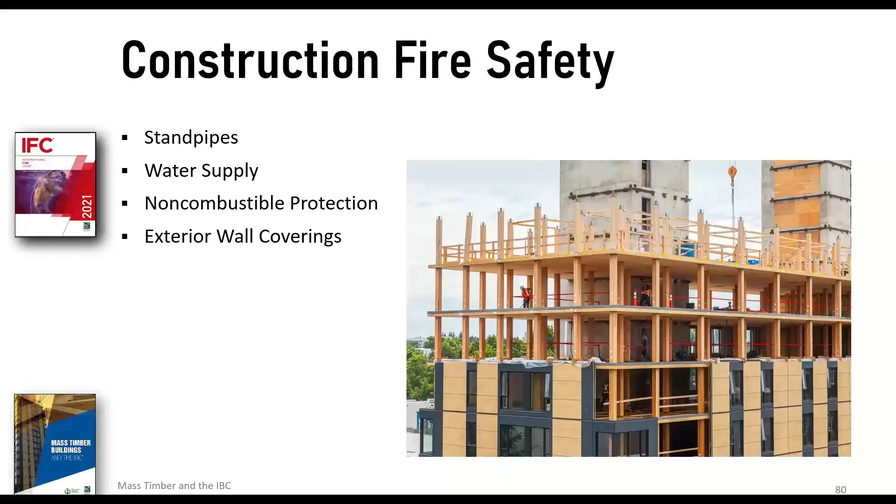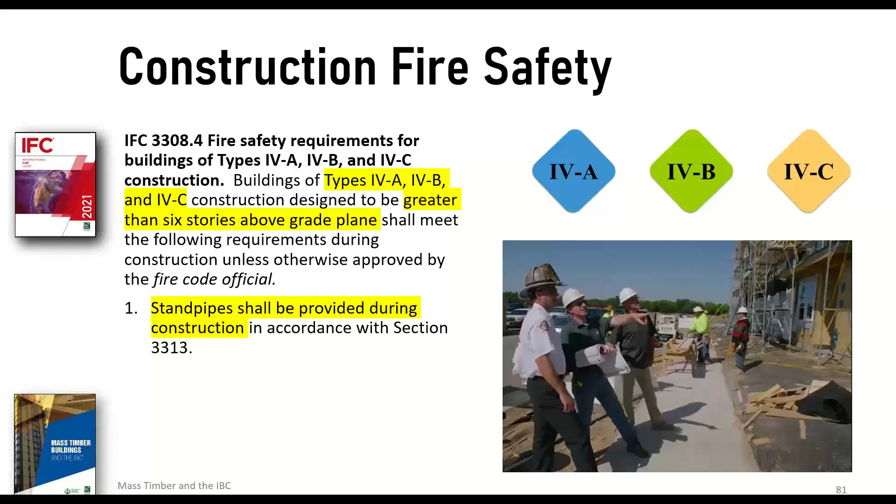But the TWB added some provisions. The first is that for type 4A, type 4B, and type 4C construction designed to be greater than 6 stories above grade plane, you have to provide standpipes during construction in accordance with section 3313 of the IFC. This applies to all types of mass timber construction.

So the standpipe requirement: where required, buildings must have standpipes during construction. Not less than one standpipe shall be provided for use during construction, installed prior to construction exceeding 40 feet in height, located adjacent to stairwells, and kept within one floor of the highest floor of construction. So during construction, the standpipe is the most important fire protection feature prior to the sprinkler system coming online.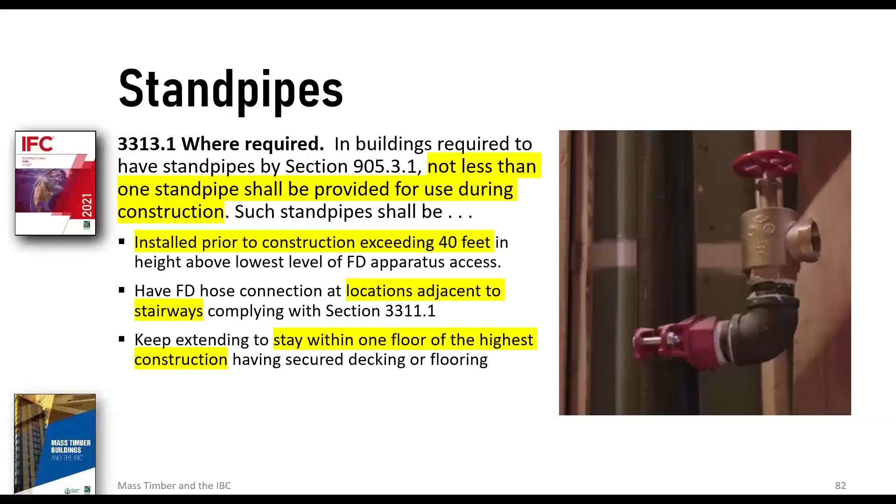The standpipe is the quickest, most efficient method to convey water to the upper floors of the structure. And minutes count when it comes to construction fires because they are so exposed. For fire departments to have to drag hose lines all the way up, or throw ladders and drag hose lines, really takes a lot of time that the fire service really doesn't have on construction site fires.

So right out of the bat leads us to our fourth and final poll question. Here we go. In buildings required to have standpipes, they must be installed before the building construction exceeds what height? 1 story if combustible materials are on site, 18 feet, 40 feet, or 4 stories?

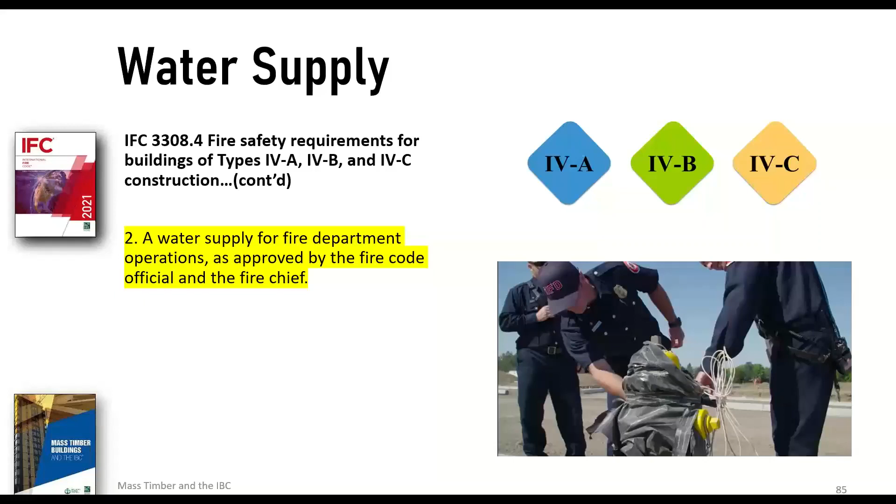Another requirement for mass timber buildings is a water supply for fire department operations as approved by the fire code official and the fire chief. So you have to have an approved water source by the fire department as soon as combustible materials arrive on site.

New provisions of the 2021 IFC and IBC provide requirements for minimum water supply for fire flow and for standpipes during construction. While these new provisions were developed separate from the tall mass timber construction provisions, they are nonetheless important for these new construction types as well.

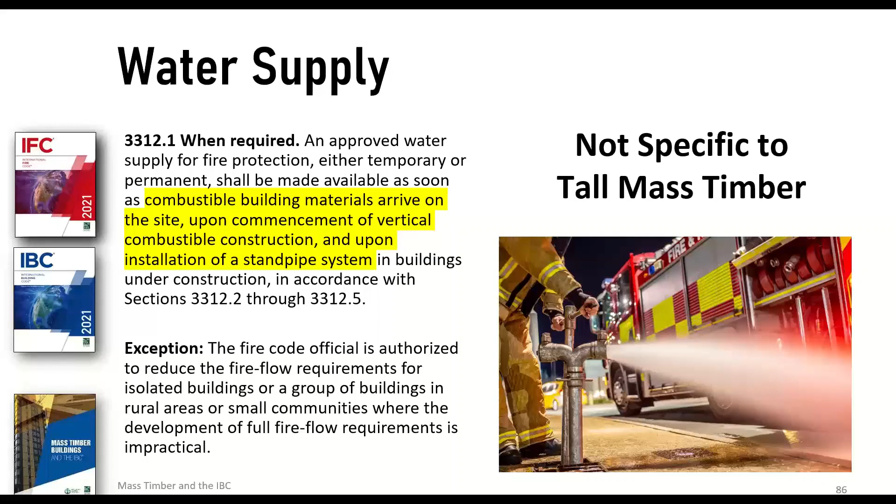And you'll see combustible materials arrive on site upon the commencement of vertical combustible construction and upon installation of the standpipe. These are the triggers.

So prior to this, the code provided very little guidance on fire flow. It simply said an approved water source. It didn't even say approved by who, it just said approved water source. So this provision actually gives a minimum fire flow.

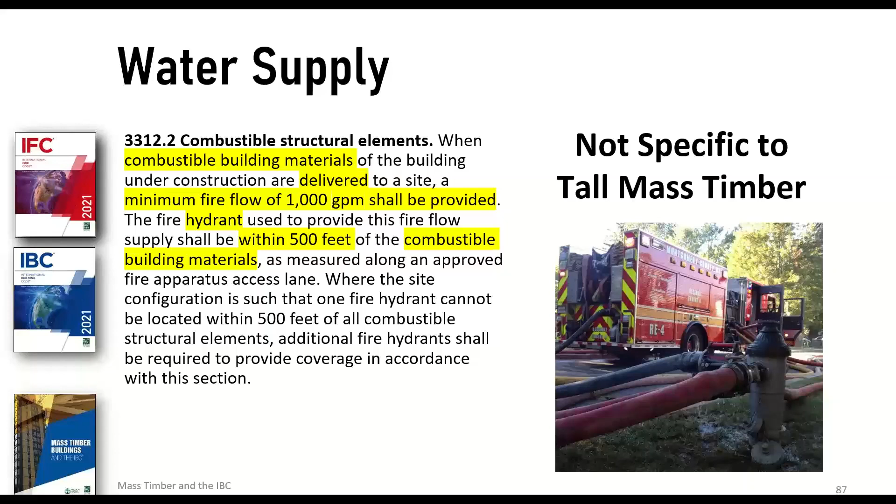So when combustible materials arrive on site, a minimum flow of 1,000 gallons per minute shall be provided. You have to have a fire hydrant within 500 feet of combustible building materials. So this gives a little bit of guidance. Now you can debate whether the amount of fire flow is going to be adequate, because I've seen multifamily type 5 buildings catch fire and the fire department can throw anywhere from 5 to 10 to 25,000 gallons a minute. But before there was no guidance, now you at least have a starting place for it.

They also considered separation from the property line when it comes to fire flow, and refined it a little bit. Again, this is not specific to tall mass timber, but it applies to mass timber, and it applies to type 3 and type 5 construction.

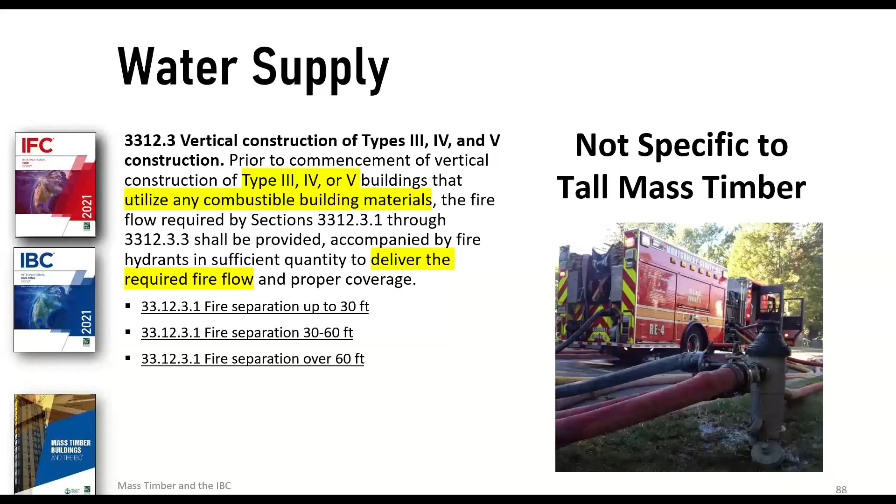And it is based on distance from the lot line and adjacent property, or a lot where you could otherwise build something. So separations up to 30 feet require a minimum flow of 1,000 gallons a minute, or the entire fire flow required for a building when constructed, whichever is greater. A separation from 30 to 60 feet requires a minimum of 1,000 gallons a minute, or 50% of the fire flow required for the building when it is complete, whichever is greater. And a separation over 60 feet, a water supply of 1,000 gallons a minute shall be provided.

The construction fires have just been a problem recently, and one of the issues with construction fires is that water supply infrastructure is not always complete prior to vertical construction of the building, and the lack of a reliable and sufficient water supply has contributed to significant fire loss during construction site fires. The fire service can't suppress a fire of any significant size without a reliable water supply.

They also have a provision in the IFC for non-combustible protection. This is the stuff that Paul talked about. Where a building exceeds 6 stories, at least one layer of non-combustible protection, where required by section 602.4 of the IBC, shall be installed on all building elements more than 4 levels below the floor of active mass timber construction.

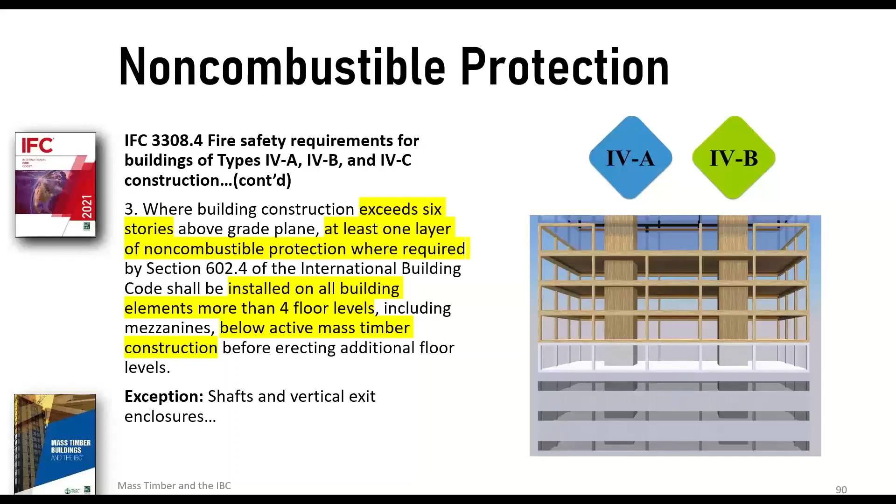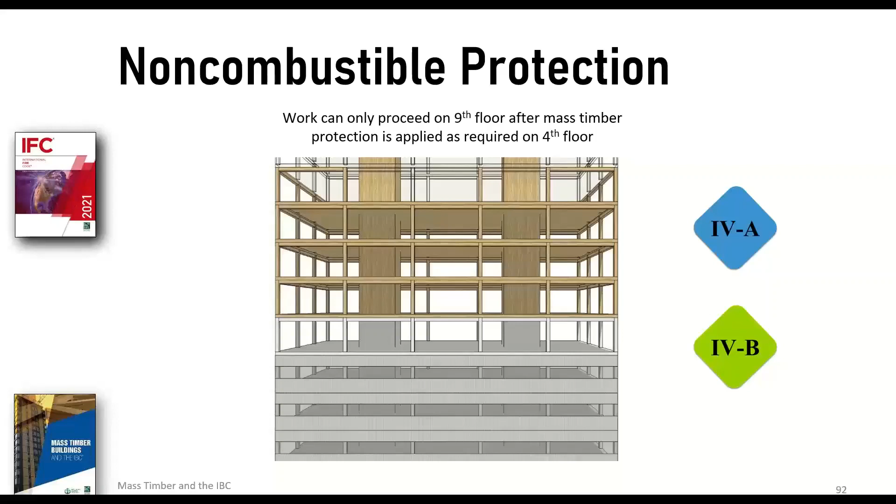Here's an illustration showing the required passive protection during construction. You can see how protection, represented as a gray color, is applied to the mass timber on all the levels more than 4 stories below the floor of active construction. In other words, in this hypothetical building under construction, work would not be able to proceed on the 9th floor until the passive protection is applied as required to the mass timber on the 4th floor, as shown here. Only then can construction proceed to the 9th floor.

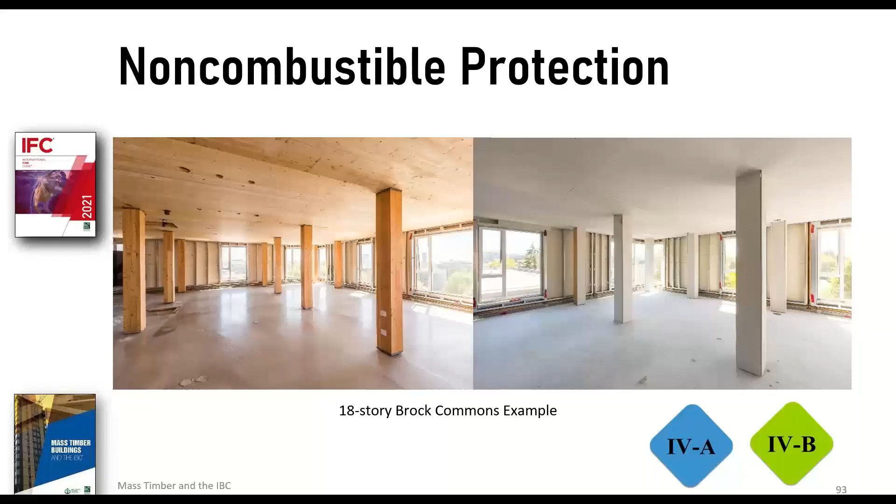Now, this is really based on what was done up in Vancouver, British Columbia. The 18-story Brock Commons mass timber hybrid structure incorporated techniques of adding non-combustible protection on floors below the active construction level. Protection included 1 layer of type X gypsum board onto the underside of the CLT panels.

Paul talked a little bit about exterior wall coverings. During the TWB study of tall wood buildings and their subsequent deliberations, the Grenfell Towers fire occurred. And this is not a picture of Grenfell Towers. Grenfell Towers was a type 1 building.

In 2017, a fire occurred. It killed 72 people. The fire started on the 4th floor and quickly spread outside the building to the exterior cladding, which on the outside was non-combustible, but in between the two aluminum non-combustible panels was an air gap and flammable foam insulation. So the fire burned on the exterior of the 24-story building.

Hence, the TWB committee was mindful to protect the exterior of the building with non-combustible cladding as the building is erected. I just want to emphasize again, Grenfell Towers was not a mass timber building. It was a type 1 building. They'd had aftermarket cladding put on or replaced for aesthetic reasons. The other problem with the building is it only had 1 center stairwell, only 1 way out. Another problem is it wasn't sprinklered.

So in a mass timber building, you're going to have sprinklers, non-combustible exterior wall coverings, and more than 1 way down and out of the building. These exterior wall coverings are required to go up with the building. Where a building exceeds 6 stories above grade plane, the required exterior wall covering shall be installed on floor levels more than 4 floors below active mass timber construction.

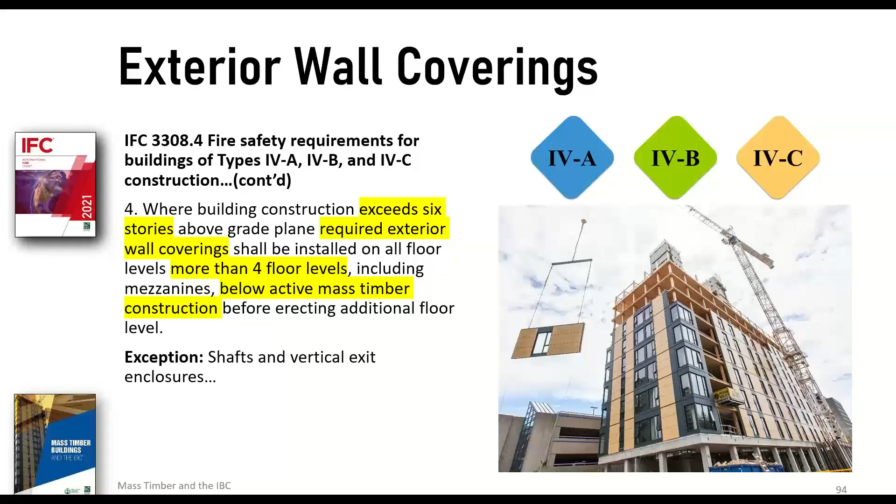This would apply to A, B, and C, because C is still required. Even though they don't have to protect all of the mass timber inside, they do have to protect it, and it has to be non-combustible on the exterior side of the exterior wall. Just note that the term 'exterior wall covering' is a defined term in the International Building Code.

So: non-combustible protection, heights and areas, construction, fire safety, and now we're at the home stretch, owner's responsibility. I think this is a really, really good provision they put in the code. The code says the owner shall maintain an inventory of all required fire-resistance-rated construction. It has to be visually inspected annually and maintained.

The International Fire Code had items for which the owner is responsible, the non-combustible protection and other requirements that are required in Type 4A and Type 4B construction. Construction materials currently required for buildings of similar heights and areas will not contribute to the fuel load in the manner that mass timber could.

As such, tall mass timber buildings are required to include specific active and passive fire protection features to protect the occupants and structure from fire. As Paul told you, the code provision requires a specified thickness of gypsum board or its equivalent for walls and ceilings in mass timber buildings of Type A and Type B construction, except for limited amounts permitted in Type 4B to be exposed. The allowable heights and areas proposed are based on additional passive protection.

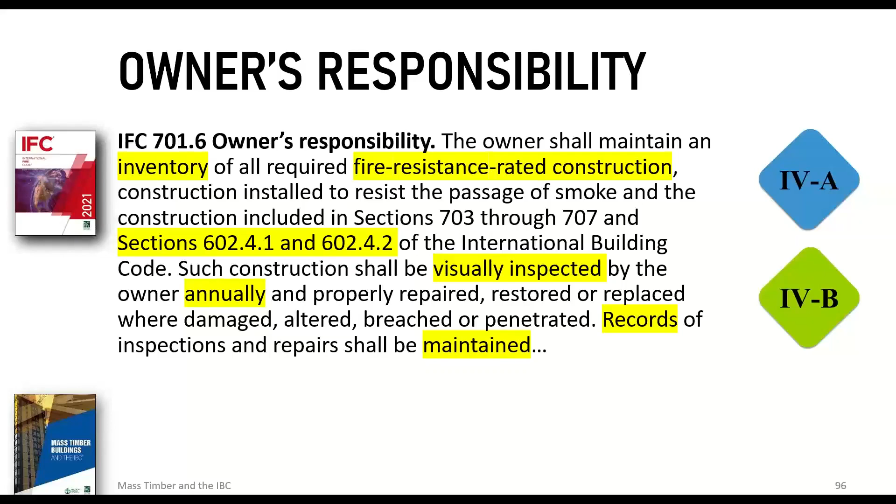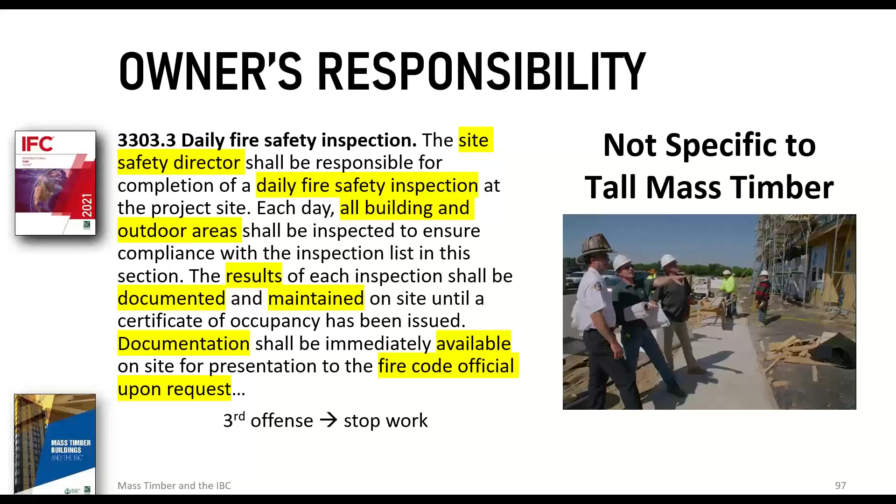The results of each inspection shall be documented and maintained on site until a certificate of occupancy is issued, and it should be made immediately available to the fire code official upon request. If they ask, and the third time they've asked the people on site cannot produce it, the fire department will have the legal authority to issue a stop work order, which in a lot of jurisdictions is groundbreaking, because you just don't see fire marshals' offices issuing stop work orders traditionally around the country. It's usually a building department function. And the fact that they have to do this every day until their C of O is issued is important. It really just builds in accountability on the part of the building owner, management, and the general contractor, where it never existed before.

The other big change that I think is impactful is that the site safety plan required by code for all construction sites has to be submitted and approved before the building permit can be issued. I think that's groundbreaking because entities never had to submit a site safety plan—or like I said, it used to be called a fire prevention program plan—to get a building permit. So once they got their building permit, we'd have to run around and harass them to get it in. Because fire departments generally can't issue stop work orders, they'd drag their feet or flat out ignore us. Once you hold that building permit over their head, they'll jump through hoop after hoop to get it. But once they get it and can put a shovel in the dirt and start building, good luck—because they're so focused on construction, they could care less about submitting a plan.

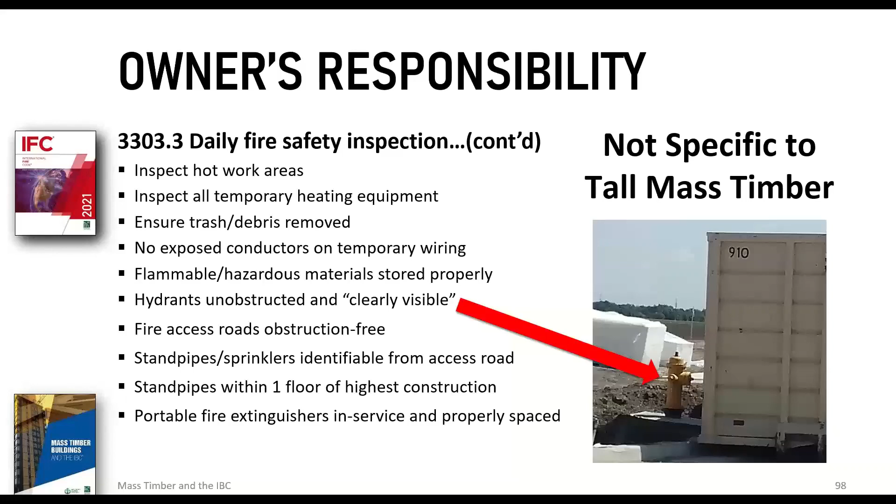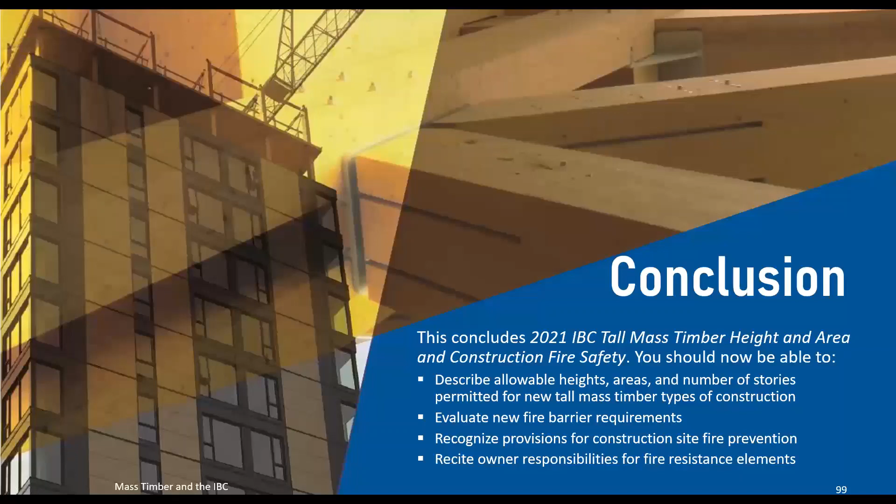So anyway, this concludes the 2021 IBC Tall Mass Timber Height and Area and Construction Fire Safety webinar. I would open up to questions now. Could turn it over to Marcy or Lori. Yeah, this is Lori. We'll do a little bit of Q&A, and then we will close things out.